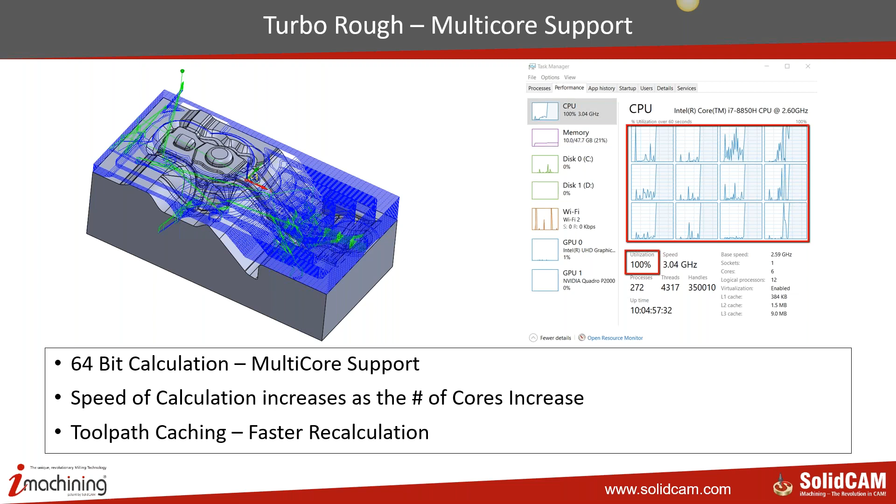The second highlight of Turbo Rough is the fact that you now have an option to define multiple surface offsets, which means you could define the entire model as one part, and then derive areas from there which need a different offset.

So this is very, very essential for mold and die makers, where they would like to give, let's say, on the parting surface, very less stock, and for the area that needs the part area, they would like to have a bigger stock. So this is one of the highlights of Turbo HSR.

Strategies, well, we have got hatch, contour, and rest roughing. All three strategies are currently available with us in Turbo Rough.

Rest roughing in Turbo HSR is based on two technologies. It's either on the updated stock or previous tool, and it also could be a combination of previous stock and previous tool. So it will find out the best possible areas to tackle and generate the toolpath only in that area.

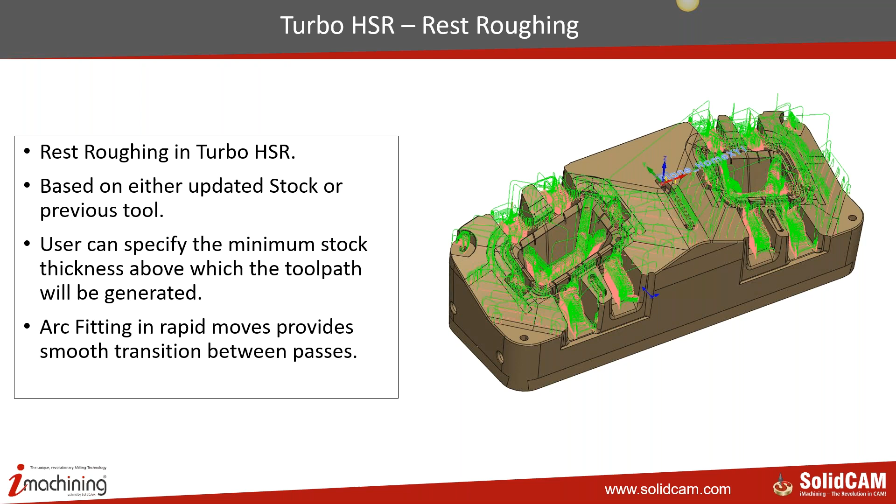You can do a local stock definition, which means you need not be dependent on the previous stock. For example, let's go back to this part here. Now, assume that the entire part was machined, and for some reason, some area needed reworking, so somebody fixed a small block of material in that region, and now you could go back to your roughing and you could say,

I would like to define the stock by surfaces. So I will pick only those areas, and the part will be the complete part, but the stock will be only the restricted area. No need to define any kind of contours or anything. Just define those 6 bounding surfaces, and that becomes the stock for that operation.

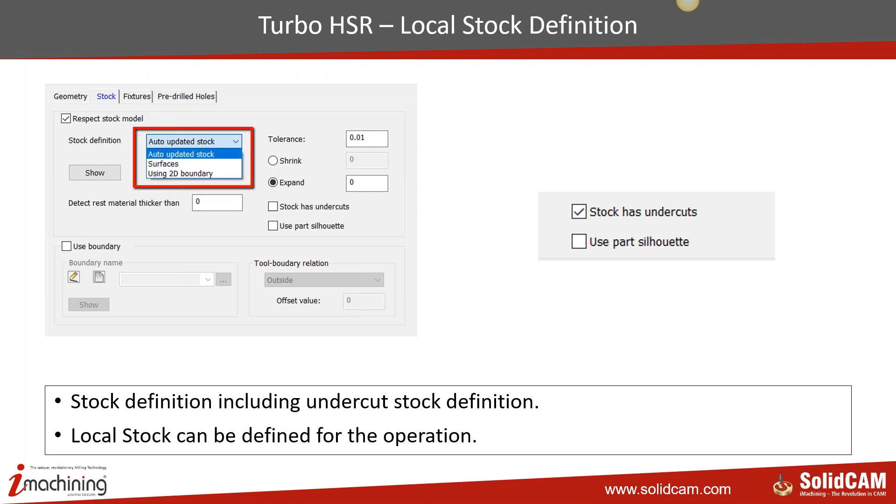Also, a very important feature is the undercut stock. I'm going to show you in this part that we are going to run today in generic 5-axis. It has got undercuts, so I will show you the effect, and you will appreciate that it dramatically cuts down the time when you compare it with our existing roughing engine that we have.

Fixture collision. You can now provide fixtures as surfaces, or it could be a complete model, or it could be just curves. You need not have the entire fixture model sitting on your part. You can just say this sketch is my fixture. It will understand that that particular area need not be machined. It will leave that much area.

You can also provide an offset to it, whether it's global, radial, or axial offset. And based on the offset that you have provided, it will leave that much area and move to the other area. It will not machine the area where the fixtures are. For example, you have clamps. So it will leave the area for the clamp and it will machine everything else.

Also, pre-drilled holes. You can have pre-drilled holes as a definition, and every time the cutter comes, it will dip into that region where you have done the pre-drill and just machine the part, mostly for cavities.

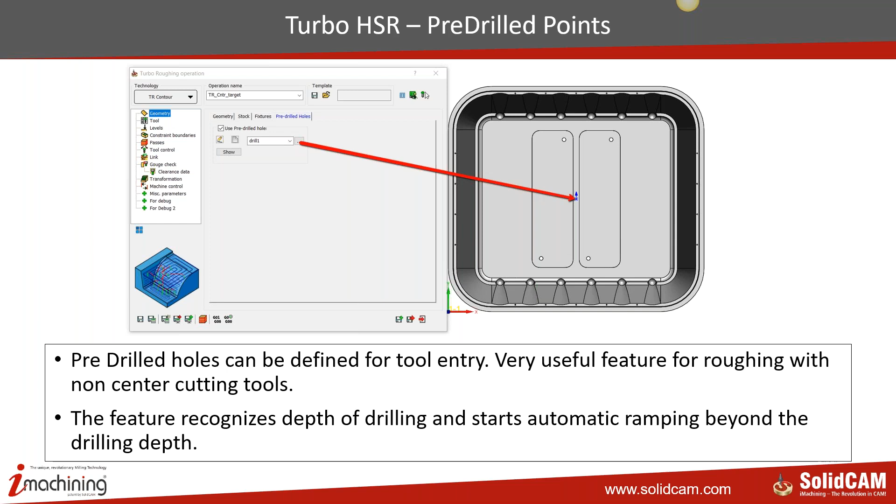Another very important thing is the adaptive feed rate. You can provide the minimum feed rate possible on that particular job with the particular cutter, and SolidCAM will find out the engagement of the tool with reference to the part and adjust the feed rates dynamically on the fly in the toolpath. In most of the cases, it will only drop it down because 100% is

my actual feed rate. So let's say it's going in a corner. There, it will automatically drop the feed rate based on the engagement it is getting with the part geometry. So this is a very useful feature for inserted kind of cutters. It increases your tool life and also provides a constant cutting condition.

Dynamic holder collision, also a feature of Turbo HSR. It provides collision-free toolpaths. You can provide your holder, and the holder will be checked against two items, depending on what the user has selected. It could be checked only with the machining surface to see if there's a collision with the machining surface, or it could be checked with an in-process stock, the dynamic stock that is available at that given point. It will be checked against that.

In most of the cases, the dynamic stock is the one that is to be used, but if you want, you could still use it against the machining surface. Of course, there's a possibility that you could provide both of them. You could say check against the machining surface and also check against the in-process stock. Remember, the more options that you push into the calculation, the calculation time is going to go up proportionately.

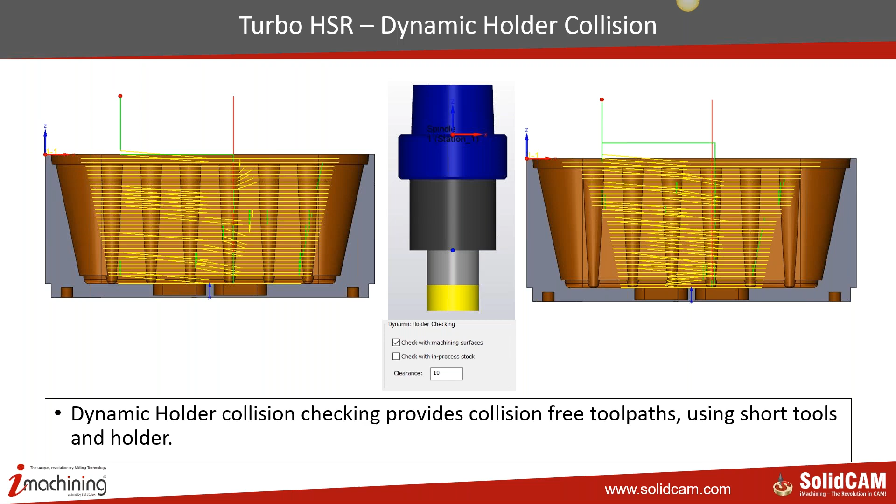Automatic ramping. You can just say, I would like to do automatic ramping, and then provide a fallback sequence or a priority sequence of ramping. So we have helical, zigzag, line, and profile. You can change the priority. You can say, I would like to first try a zigzag ramping. If zigzag fails, go to helical. If helical fails, go to line. If line fails, go to profile.

Okay. This is with the Turbo HSM. The announcements mostly were with the toolpath quality. We have got a much more accurate sharp motion now in the Turbo HSM toolpath, and we provide a very small radius so that we don't damage the wall.

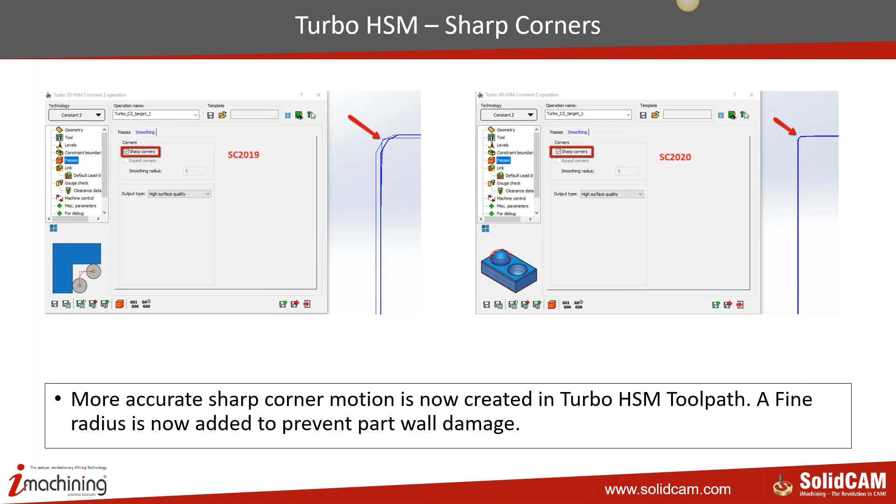A new operation, 3-axis undercut milling. It's a simple constant Z machining where you can just provide a model to it, and the cutters accepted are slot end mills or lollipop end mills. Either of them can be given as a cutting tool, and SolidCAM will go in all those areas where the tool can reach. It doesn't matter if it's straight or it's an undercut. If it's an undercut, it will try to get inside.

But the most important thing here is it will take into account the shank geometry, and it will make sure that there are no collisions with the surface when it's getting into the undercut region. So it's a very safe strategy to work with.

For example, the most common item that generally requires undercut milling are shoe molds. So if you have got a shoe mold and you would like to do undercut machining using a lollipop tool, you can just say, this is my model, this is the tool, this is the depth of cut, and it will ensure collision-free toolpaths against both the part surface as well as the shank with the part surface.

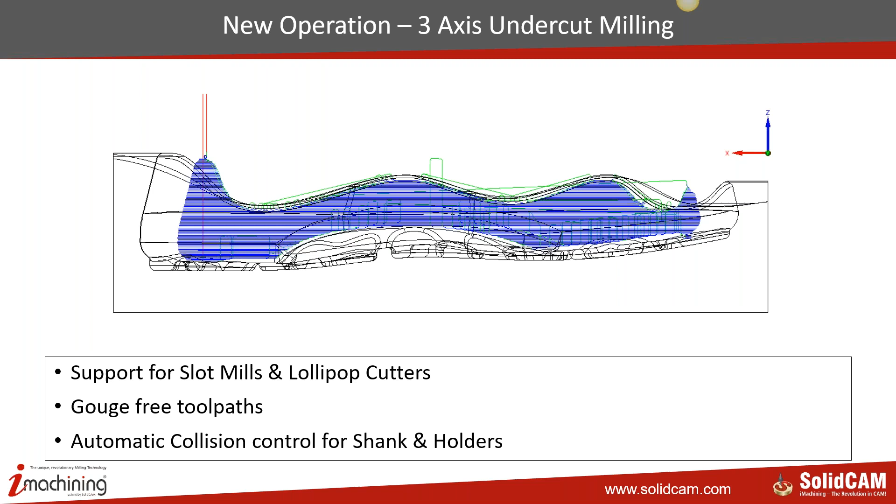Let's come now to HSS and Sim5X. It's more to do with Sim5X. First of all, you can see that we now have the progress bar. We no longer have vague messages appearing. You know exactly where the operation is, how much is done, how much is remaining, so nothing is blind. The entire calculation progress bar is now available for all Sim5X and HSS operations.

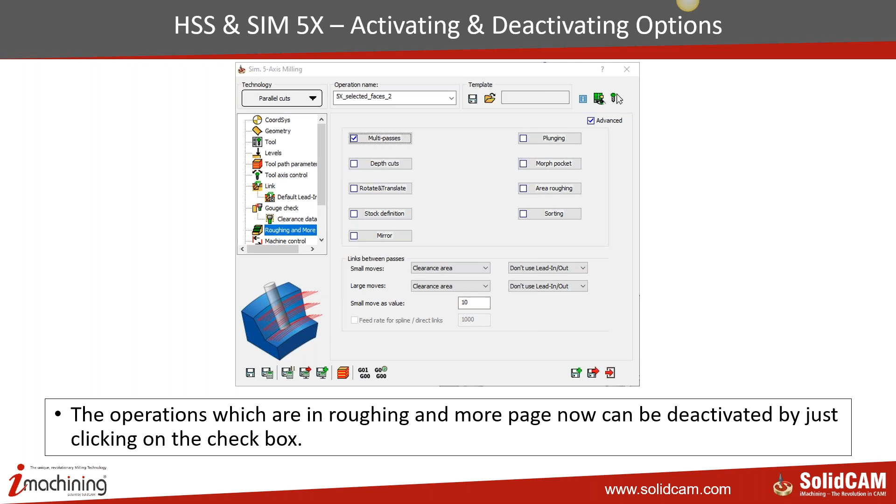You can activate and deactivate options without getting into the, let's say, for example, you want to do depth cuts and you just want to switch it on, so you can just select that and that will be done. This you will not see in SP0, but it will come in the subsequent sub-release of SP0.

Multiple boundaries definition in a single HSS toolpath is now possible. Earlier, even if you defined multiple, it would only take the first one and leave out the other two. Now you can define multiple boundaries in both Sim5X as well as HSS toolpaths.

Extension of toolpath. Earlier, if you had multiple faces to be machined and you said, I would like to extend the toolpath, the extension would be visible only on the first pass and the last pass. But now, because of regions, the extension is available for each region. Both the entry and the exit extensions are available for every region when you are doing the toolpath calculation.

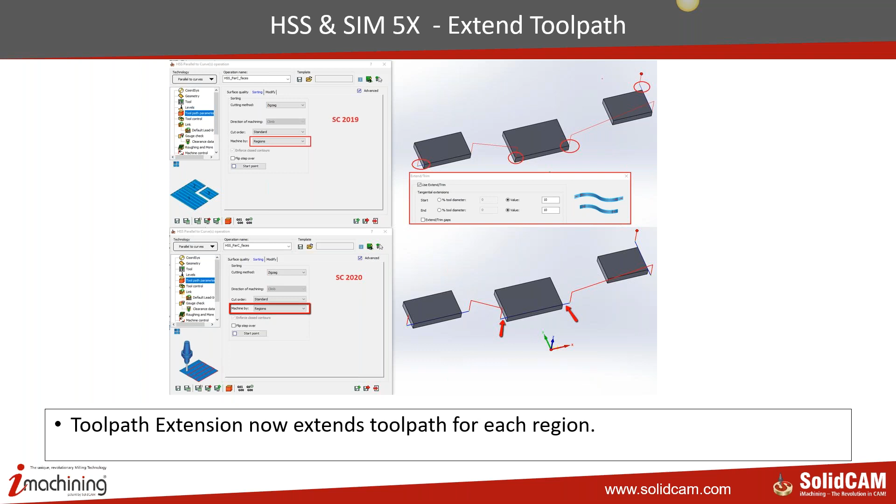Sim5X and HSS now come with a new option called automatic clearance plane. You need not define the type, you need not define the height. You can just define automatic clearance plane, and the tool will get retracted in the proper direction. The height as well as the type will be decided automatically by SolidCAM. Right. So these were some of the enhancements that we did with respect to HSR, HSM, and Sim5X.

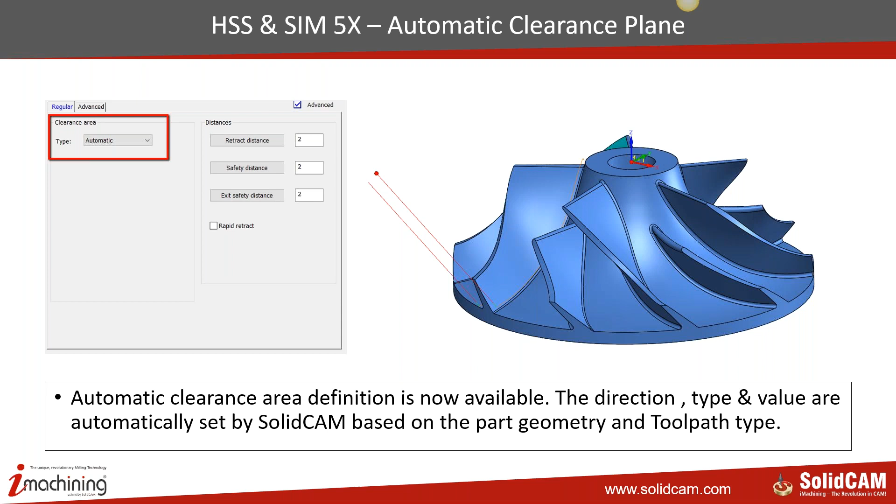Let's get to our part today. Okay, we have got a pretty nice part today to work with. And we are going to be working with this part using all the functionalities that are available to us. So I have got a nice part here and also the stock. So let's open the stock.

And that's how my stock looks like. I've already done the, you can see either I've milled it or I've done the wire cut, and it's put on the holding fixture. The holding fixture is then held on a vise and the vise is then put on a 5-axis machine. So we would like to do the machining of this part.

The machining of this part will see several operations. It will see some 2.5D operation. It will also see the new turbo HSR operation, and it will also see some nice generic functions. I would like to show you several of them as far as possible on this part, because in the next couple of weeks, we also are going to have different parts to work with.

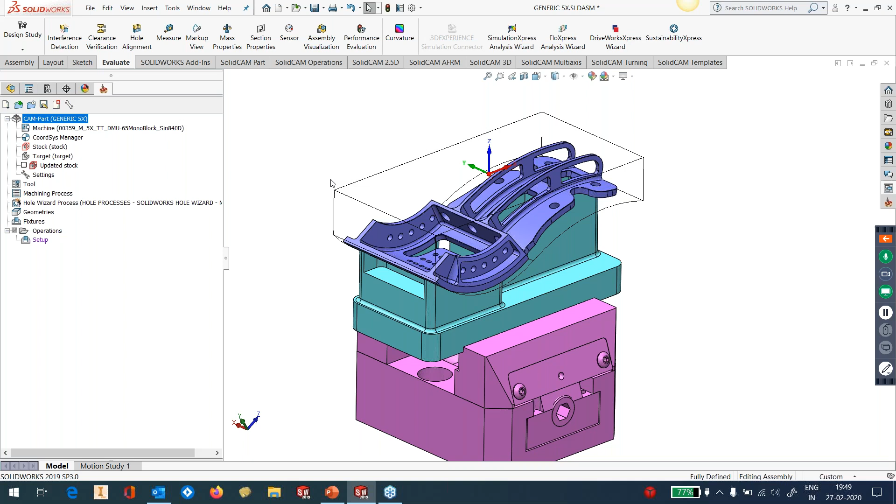Right. So let's start our operations. Now, what I've done to simplify this entire exercise of showing you the toolpath, I have saved a lot of templates. And this has to be one of our USPs. When we do a demo in front of a customer, we should have tons of templates, give a proper name, put them with the new version.

They are automatically segregated and arranged, so we don't have to worry about it. Each template goes into that particular operation subtype. Use as many templates as possible. Show to the customer how easy it is to work with SolidCAM, and it's really pretty easy. So let me open the template today, and the first thing I'm going to do today is to do some facing operations on all the 5 sides.

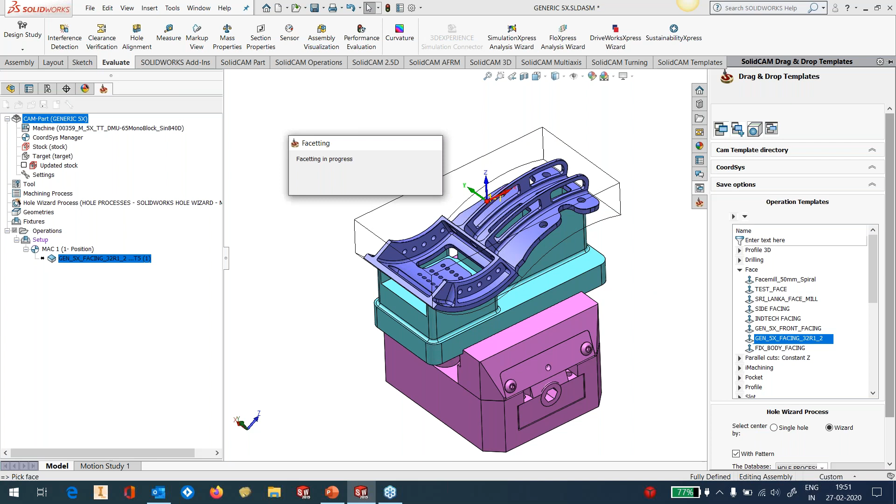So I'm going to call my first template. So I'm using a 32R 1.2 high feed bullnose for my facing. So I'm going to drag it and put it on this here. I'm using a stock-based approach for my facing. Okay, so let me edit this. We also have a possibility to edit the template once it is applied. Let's put that value. That's my toolpath. That's the first toolpath that I've generated.

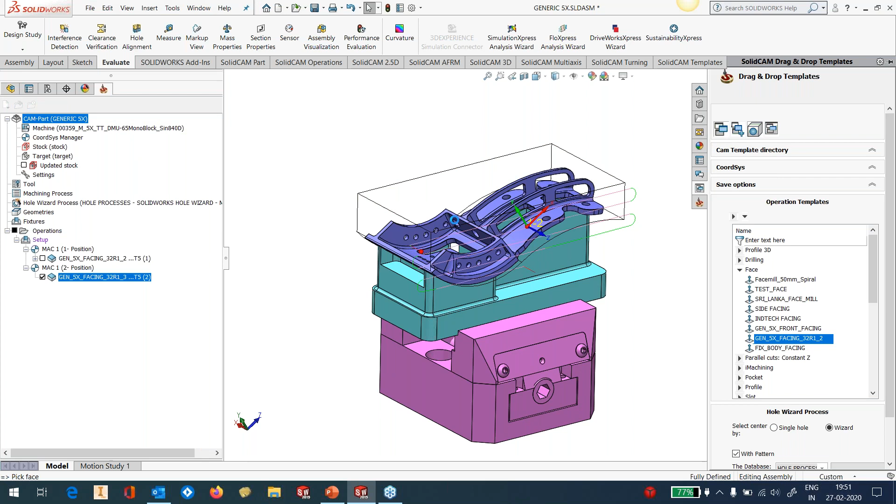The next one, I'd like to put on the side. Okay, let me edit this also. Okay, that's 0.3 millimeters. Calculate. Okay, let's take another template and apply it to the other side. I'm doing this because I would like to have a very precise stock for my new roughing operation. So that's the reason why I would like to do the facing, because my stock itself is about 10 millimeters plus on both sides. Okay. Sorry, it's already calculated.

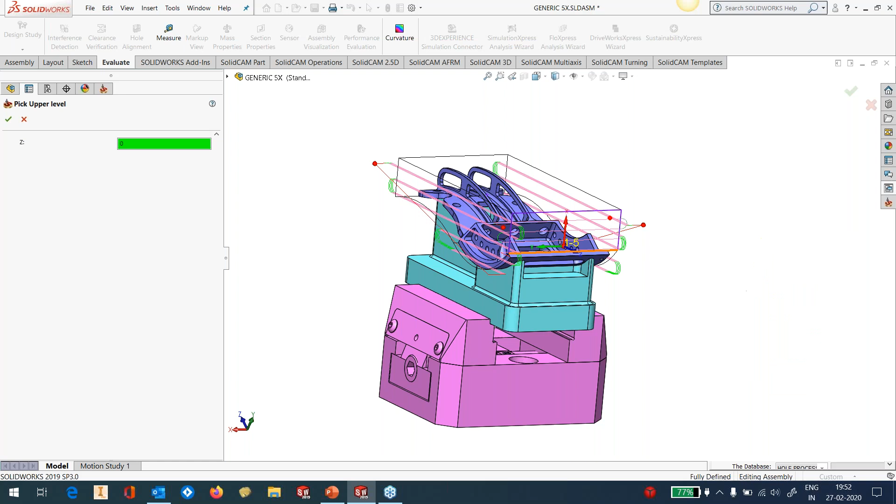Let's drag on this out here. Edit. Unfortunately, I did not save it. I've saved it as a single pass operation, but I would like to do a multi-pass. So it's also very important that we show that once you apply the template, you could easily edit this toolpath and change the values whatever you want, and finally get the results what you're looking for. Okay, this is done. So we have got our toolpath perfectly done.

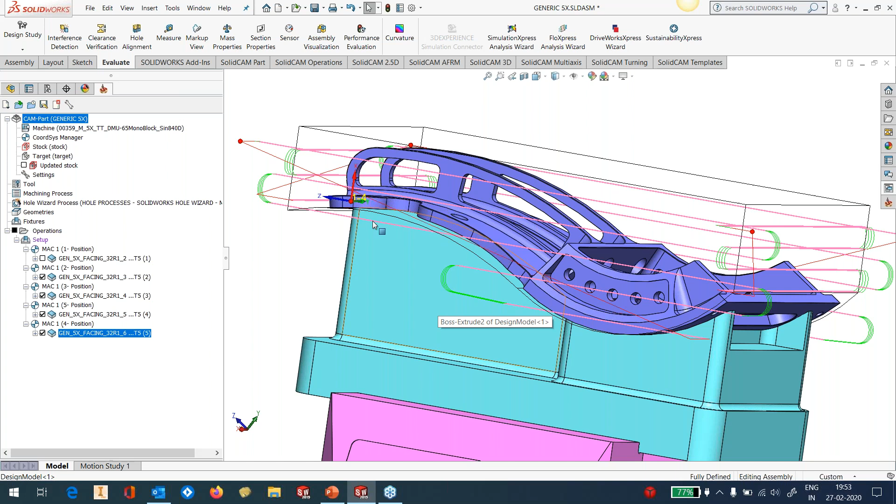Why I use the stock method is pretty simple. You can see that this particular stock is a shaped stock, and if I had not used the stock method, I would have got unnecessary passes here which would run in air. So in order to avoid those air passes, I'm now using the stock-based approach for doing my facing. Okay, so let's run the simulation a bit. Let's go into the SolidVerify. Okay, we have got the fixture, the stock, and everything ready. And let's quickly run. That's pretty fast.

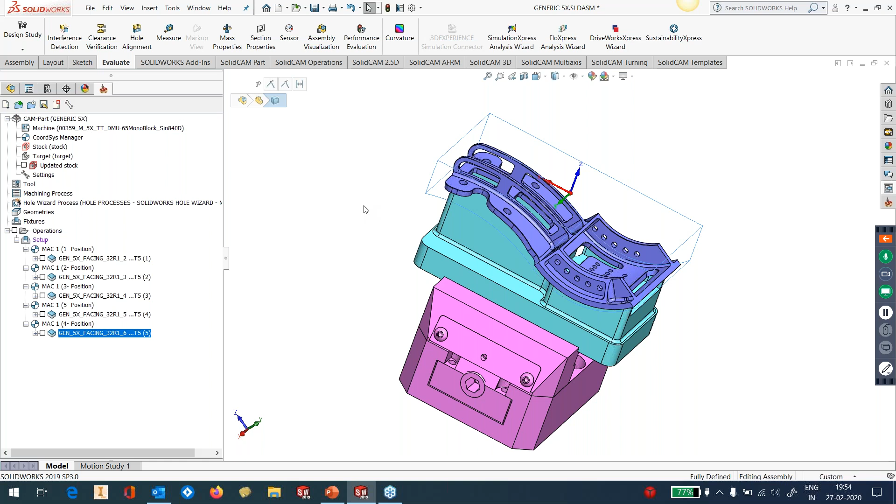That's good. So we have now shaped the stock exactly to the size that I want. And now we could go ahead and apply our first operation of 3-axis roughing. And like I said, let me just switch off the stock now. I don't need it anymore. Okay, like I said, we are going to use the turbo roughing. All those features that I showed you, we are going to now apply those features. So I'll go to my template. I already have my template here in the offset, 3x rough offset.

You can see that with 2020 now, each of the templates are arranged according to their type. So all facing templates will go into the facing templates zone. Drilling templates will go into the drilling templates zone. Roughing templates with 3-axis will go into the 3x rough offset zone. So I'm going to just drag and put my template here, just apply OK. So this is our new roughing operation. So you have got contour, hatch, and rest rough.

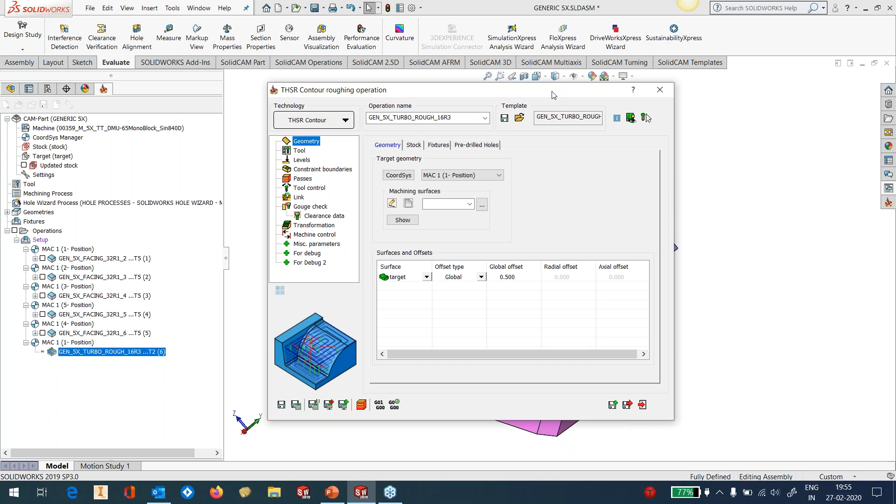So let's go to the geometry page. I'm going to spend some time, but remember that we are going to have a special webinar only for the turbo technologies a few weeks down the line. But still, I would like to touch on this since I've used it in this part.

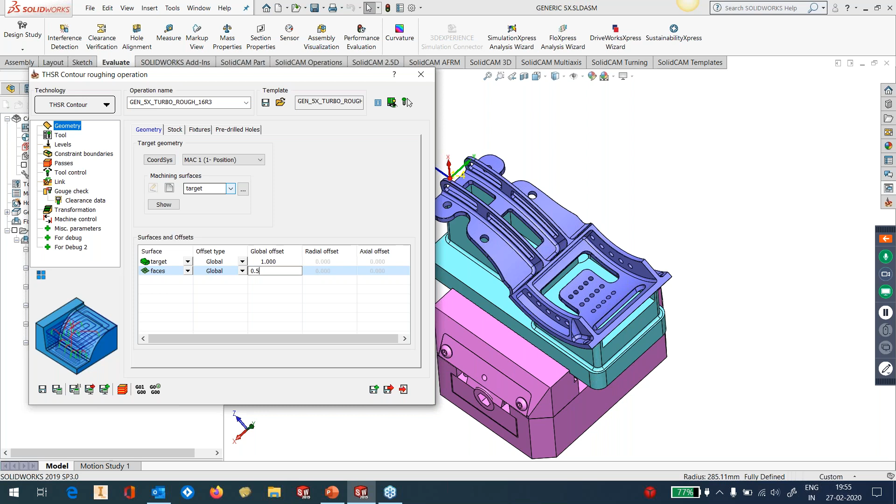So first of all, we are going to select our target. This is our main target. And then I have got my offset type. I would like to keep 1 millimeter offset on my entire target. Now, you could say, on this face I would like to keep 0.5. So go here, select, and select the face, maybe both of them. And here you can see that immediately you get an option to put a second offset. So I would like to put 0.5 millimeter for this.

And you can do it for an infinite number of groups. You can have infinite offsets, but trust me, it's not a great idea. Generally, there are 2 to 3 groups, not more than that. But the fact is that you can now define different offsets for different groups of surfaces. What we do basically is from the target, we subtract these faces and have a different offset for them, and for the remaining target, we will have a different offset.

Okay, but we don't need it, so I'm going to delete. We would like to keep 1 millimeter everywhere. Stock, I would like to respect the updated stock. I don't need to define a fixture here because we don't really need it. Let's go to the tool. I'm using a 16R3 bull nose tool. And here I'm saying with the dynamic holder collision checking, check with the in-process stock with a clearance of 2 millimeters.

Now, go into the feed control and you have got the adaptive feed rate here. I'm going to switch on the adaptive feed rate, and say the minimum feed rate it can go down to is 60%. I would like a rapid approach and a rapid retract, and everything in between will be G1 with this feed rate. Only the first and last motions will be in G0, whereas all motions internally will happen in G1.

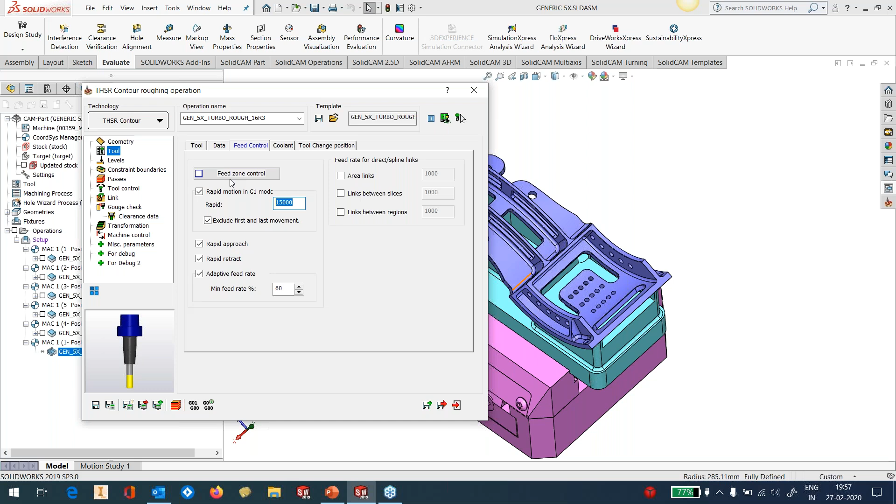You can also provide, like HSS, feed control zones, but you actually don't need it because you already have an adaptive feed rate. You can have different feed rates for links, link between slices and link between regions. You need not use 15,000, maybe you can use 10,000 or 20,000, whatever you would like.

Let's go to levels. You can see that in our levels, we have the clearance plane, and we have said detect the plane height automatically. You don't have to put the value. The plane height will be decided by SolidCAM automatically. You only have to provide the retract distance, your safety, and your exit distance. And up to what level should the tool come in rapid or in G1 15,000 feed rate?

Here I've said up to my previous Z height. So whatever my depth of cut, if it is 1 millimeter and I've already done 5 millimeters, it will come in G1 15,000 to Z minus 4. And from Z minus 4 onwards, it will use the plunge feed rate. I'm also going to use an arc fit for my retracts with a radius of 5.

Boundary, you can see that it's not essential in turbo roughing to use a boundary. The moment you use the boundary, you're restricting the tool and telling it that it cannot enter from outside. By providing just the stock and saying I have a center cutting tool, you tell the software that it can approach from outside, but where it cannot approach from outside, it can ramp into the part. So it's not always essential to define boundaries with turbo HSR. You can skip the boundary definition if you have the stock defined properly.

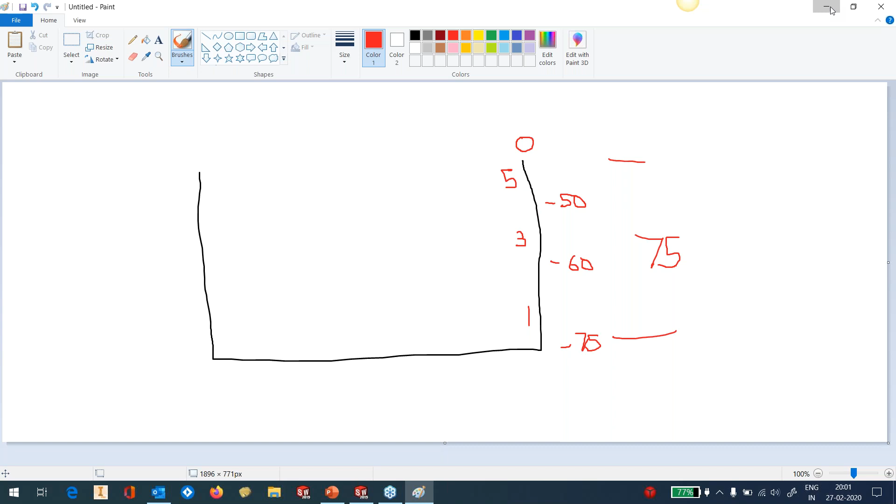It's sometimes essential, especially when you're doing deep jobs, that once your tool starts getting in deeper, you would like to reduce the depth of cut. You need not go with the same depth of cut. You can provide a range and a depth of cut, and it will apply it similarly to your part. You can machine the flatlands straight away in the very first attempt. You need not come back and do another roughing operation.

Smoothing: you can smoothen the corners, the final contour, you can smoothen the links, and you can also minimize the links. So it will link regions in such a way that reverse linking is minimized. It does not come back to the same region after doing something and do the region again. So those things are avoided. Nothing much in the tool control.

In the link, like I said, we have ramping. You can pick auto, and then you can set your ramping priority sequence: line, helical, zigzag. You set the sequence, and the software will pick the kind of ramping automatically based on the area and the profile. We don't need to provide gouge check unless you are having collisions, but it's going to be very, very rare that you'll have collisions with Turbo HSR.

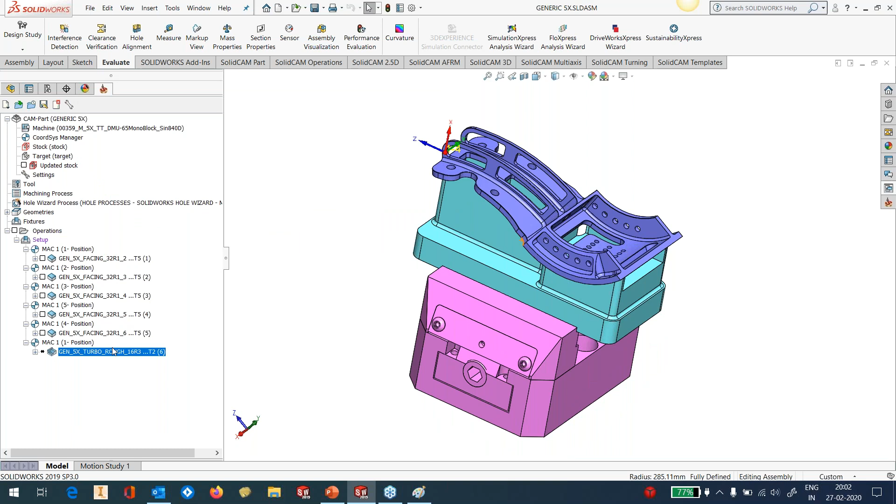We have got both translate and mirror in this. We still don't need anything, so let's save the operation and hit the calculate button. For people who are very interested, you can look at the CPU utilization. It was 100%, because now it's almost done the calculation. So there's no more CPU utilization, but I'll keep this window going.

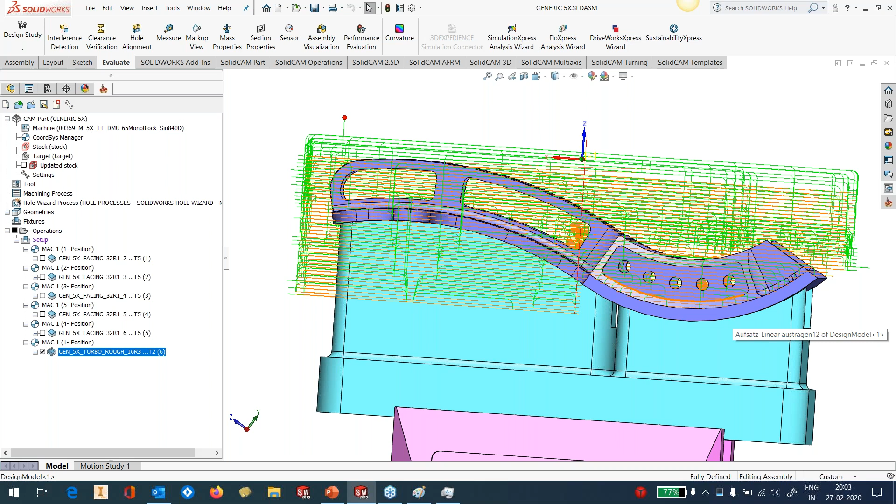So I get a toolpath. If you were an HSR fan or an HSR person who's worked a lot, you would realize that your stock ends here, but your passes are still going down there because the region still is on this side. These passes are going in air. Our solution if we did not have Turbo HSR was to create a surface here and forcibly stop the tool by providing that surface as part of the part geometry. All those things are not needed.

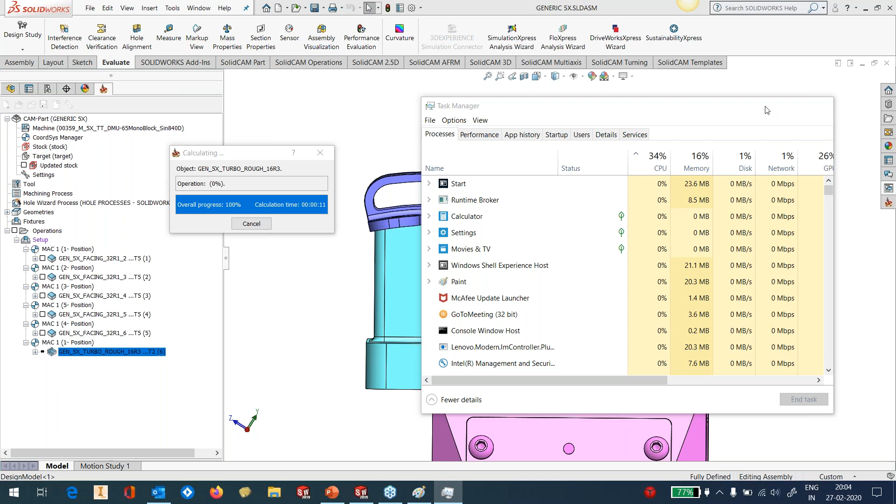So let's edit this toolpath. Let's go into our geometry, stock. I simply select the stock as undercuts button, save it, and calculate. Again, we are almost touching 100% CPU utilization. Since it's a pretty short calculation, you cannot see it, but trust me, all cores will be utilized 100%. You can see the result now. It understands that the stock did have undercuts, and it was only doing air machining otherwise. So now it has taken the shape of the stock and stopped the toolpath accordingly.

Very important feature, because you could be spending at least 15-20% more time just cutting air and doing nothing else. Your customers or your own colleagues will say that this could be removed with editing, but editing for me is a dangerous operation. The best thing is to generate properly without having to take your scissors and start cutting, because you don't know what the potential hazard of editing would be.

So a very important and nice feature where it takes the shape of the stock and exactly machines it the way the stock looks. If there's an undercut, it'll exactly stop there. Very important feature. So let's move ahead and start with our generic 5-axis.

I've been asked several questions several times. How does our software fare with X? How does our software fare with Y? How does our software fare with Z? How do we differentiate?

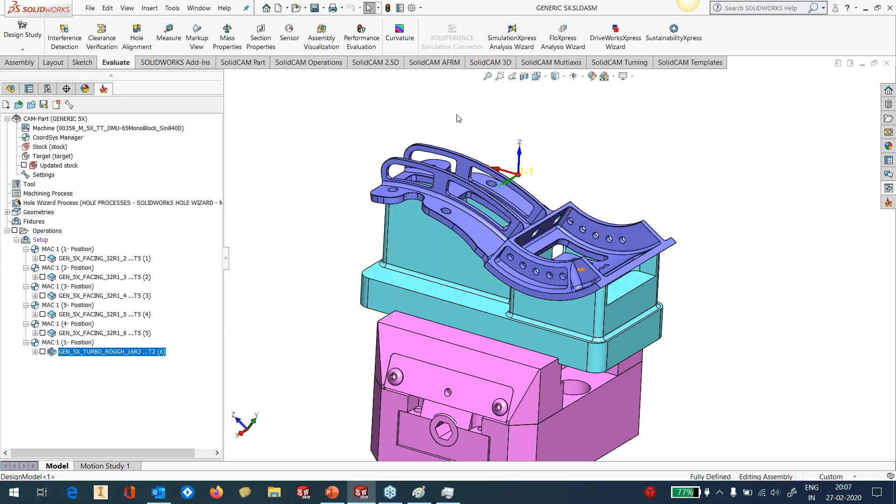So let's start. First of all, I have this area to be machined. I still have material here, so I would like to shave this material off and finish this face. What I'm going to do here is use our swarfing engine. I've got my templates for swarfing, so I'll go to swarf machining, and I have got the side swarfing - I just take it, drop it out here.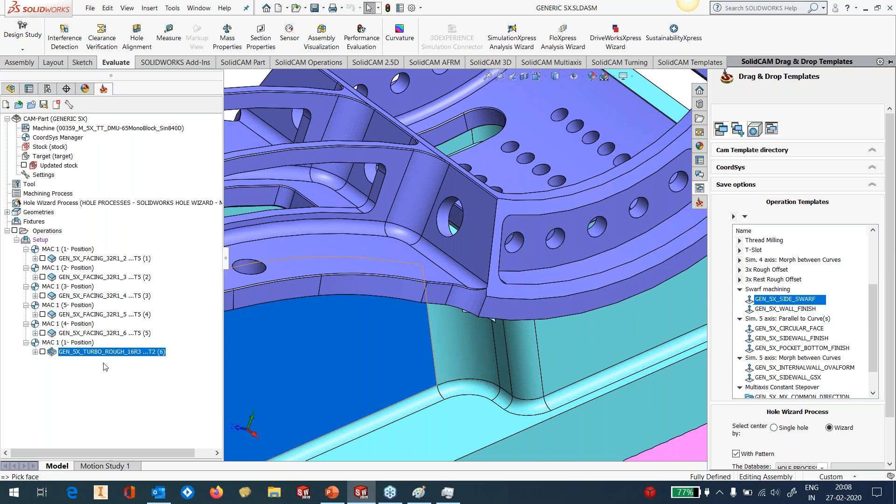What I just need to do here is define the swarf surfaces. So I'll pick the swarf surface - that's my surface. And remember, this particular swarf surface has got two possibilities: the tool can come from here, or the tool can also come from here, because we have not said from which side it needs to come. So in order to make sure the tool comes from the proper side, we just will define two curves.

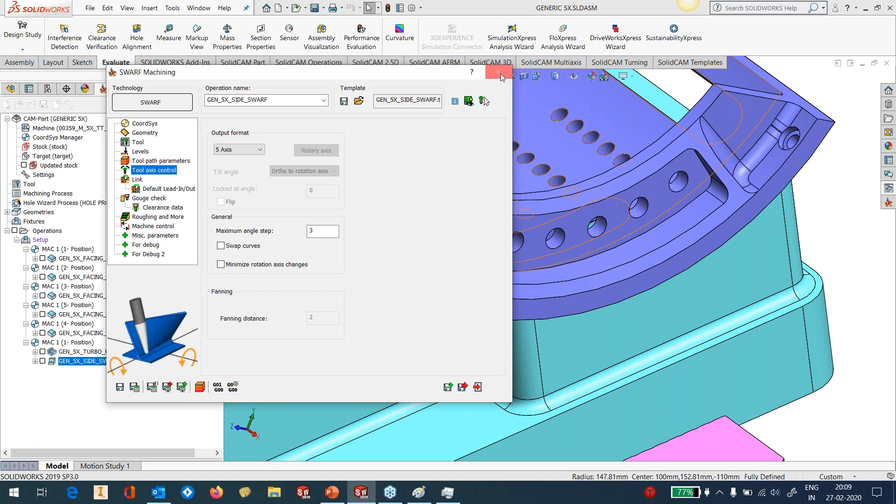The upper curve - okay, not that much, that's fine - and the lower curve. Okay, we don't want it to go there. That's done. And you show the customer: look, my tool is all defined, everything is defined. I simply hit save and calculate, and I get the toolpath. That's it, it doesn't take much time.

So let me change the color so that the toolpath is visible - I'd like to change it to yellow so that it's visible. Save and exit. So that's the toolpath, very neatly done. And if I now run the simulation, or show you the HostCAD simulation, this is how the tool is going to look: one pass, second pass, third pass. That's it, my face is done.

Trust me, I was at a customer a few weeks back, and the customer recently had bought SolidCAM, and was a user of one of the most powerful 5-axis software solutions. I sat with him because he became a nice friend of mine, and I asked him, I would like to see some things in the software because I've heard a lot about it. So I asked him, just show me a simple swarfing operation - take a straight wall and show me how the swarf works. The customer had used that particular product for a couple of years, so I believe when you've used a product for a couple of years, we expect that you know at least some things in it.

But trust me, even a simple swarfing operation, which is not automated - you had to define a lot of things. It was a nightmare in that product. But look, I've picked up a template, just came, applied, selected my geometry, my toolpath is done. I did not break any sweat on this particular toolpath. So the whole idea here is to tell you that as long as you're on the highway - when I say highway, I mean those automated functions like what we have: impeller milling, port machining, screw machining - as long as you're on the highway, most of the products are pretty much similar.

Obviously it won't work because it still needs the curve, so I'll pick the edge curve—that's my edge curve. What I've done is kept a margin of 1 millimeter from the wall, so I'm not going to touch the wall; I'm staying 1 millimeter away. So all I now need to do is hit save and calculate.

Okay, this is T3. Let's look at what T3 looks like—this is my toolpath that's done. You can see we've provided a very nice ramp. Again, this is a trick I think everybody knows.

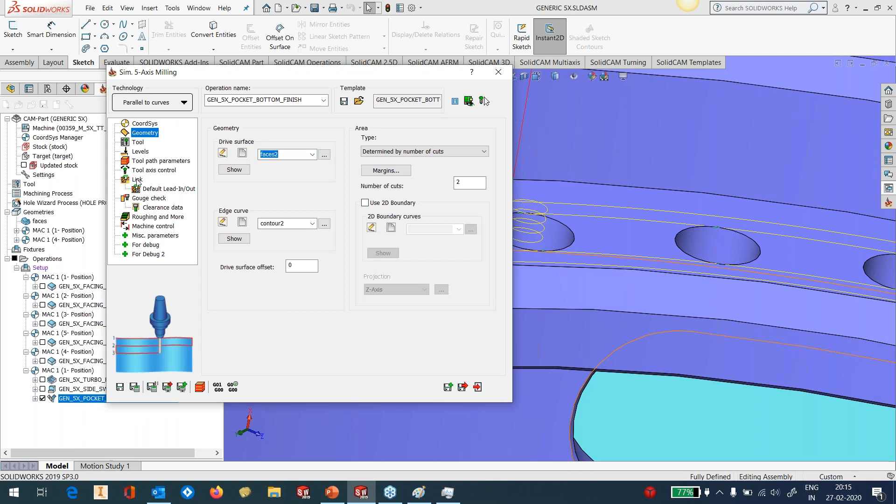There it is, very nicely done—it approaches inside, finishes the floor, and retracts. Done. Again, in the levels, I've used the clearance type automatic. I didn't specify where my plane is or how far it has to go, nothing—I just said automatic, and it's done.

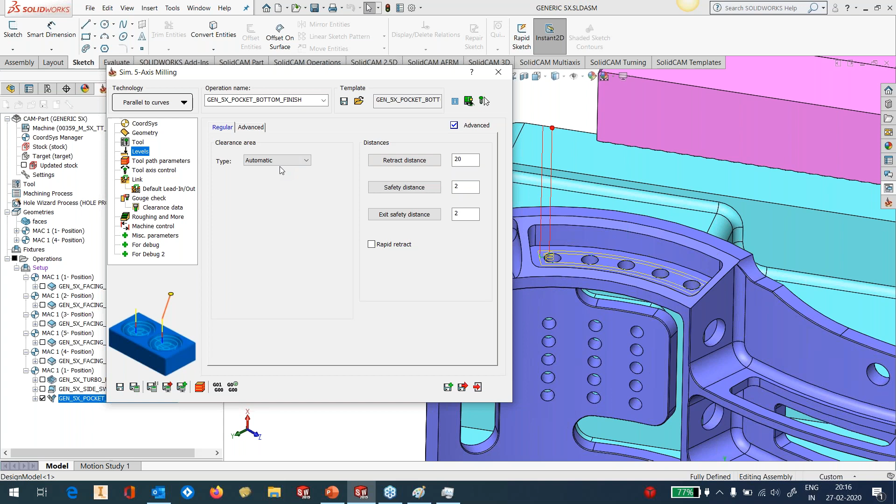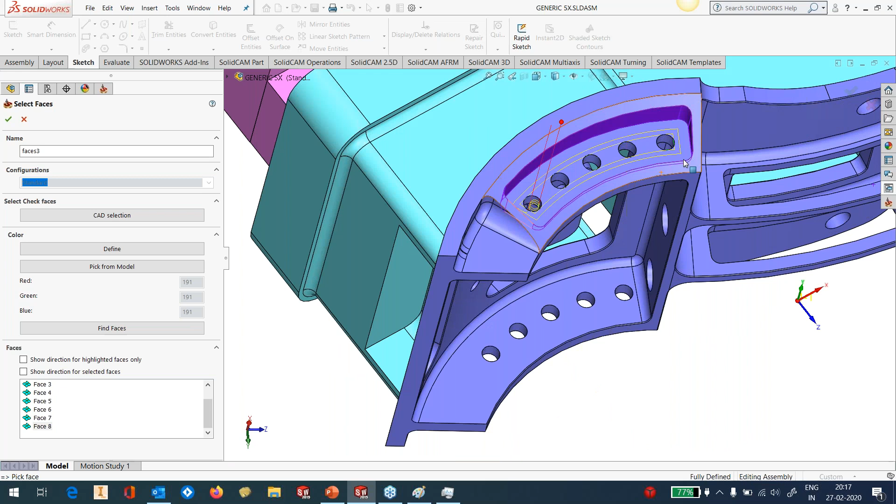Once that's done, I'd like to finish the walls with my generic setup, using a swarfing technique. I'll go to my swarfing templates—I've got the wall finish template here—just drag it and put it into my tree. Let's define the walls I'd like to finish: pick this and this. Okay, say okay. I expected that, so I'm going to use and drop it here instead.

So let's go to the geometry, swarf surface. But in this case, I'm using a different way of using swarf. I'm not going to use the automatic functionality of swarf, but also going to provide a floor surface so that my tool goes there and stops.

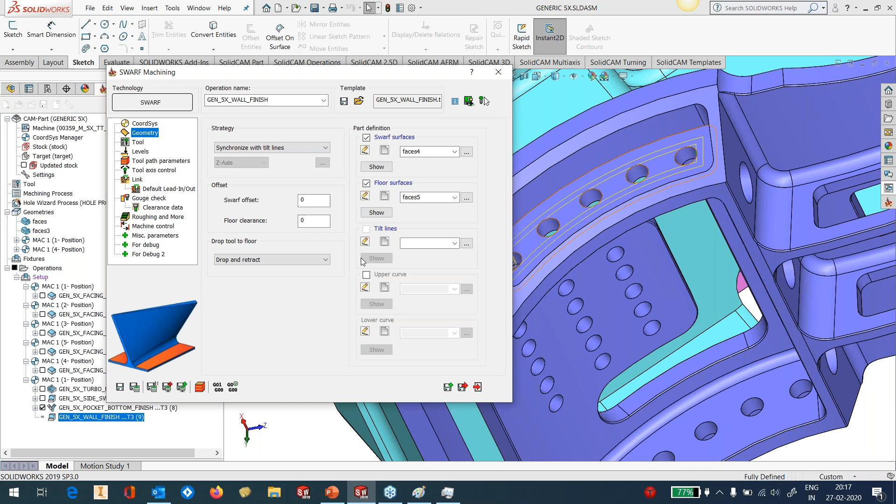I'm also going to use tilt lines because I want to control the tool axis. I don't want the tool to dance in areas because some of the surfaces are not great, they have different ISO lines, different widths. That's the reason I'd like to define simple tilt lines, 8 of them.

So just pick 2, the third, okay, fourth, then after the fifth one, sixth one.

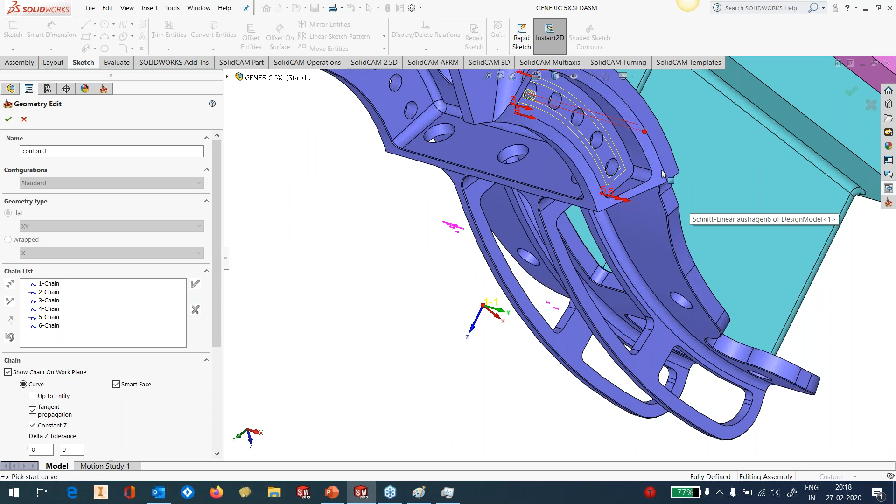You will ask me why did I not save this also, but you know, I created a new part. I'm only using the templates for my parameters and the strategy. I have got 6 tilt lines. That's okay, and let's calculate.

That's done. So I have now got the side machined also. It is not 2.5D, by the way. It has got some kind of draft, and if you look at how the simulation looks like in SolidCAM, this is how it will look like.

Neat. Again, here you can see automatic clearance plane, no need to define anything. Okay, that's done. Let's look, because it's a symmetrical part, that's the reason I'm doing only one side.

Let's look at this region here, and I would like to now tackle this region. Again, I have got templates. Here I've used the generic 5-axis template. So I'm going to go parallel to the wall, parallel to curve, rather, side wall finish.

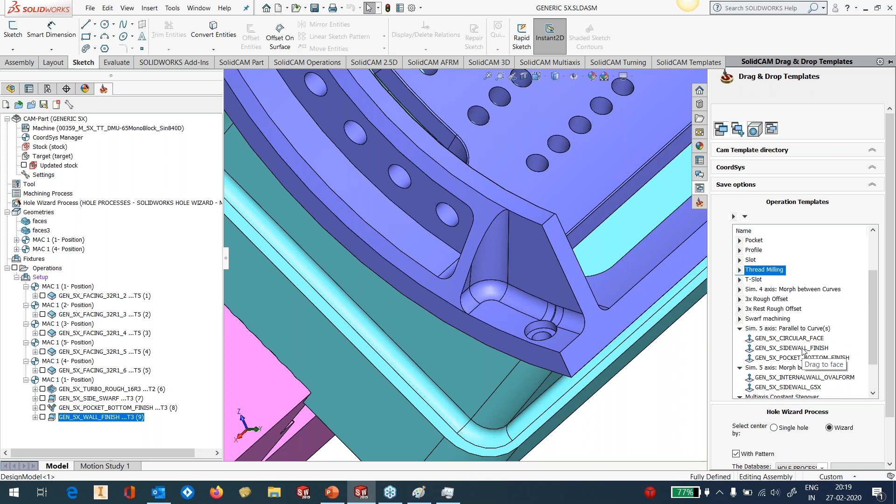Okay, let's drop it here. Say okay, let's open up the operation itself. My drive surface, 1, 2, and 3 drive surfaces. And my edge curve is this one. Reverse it.

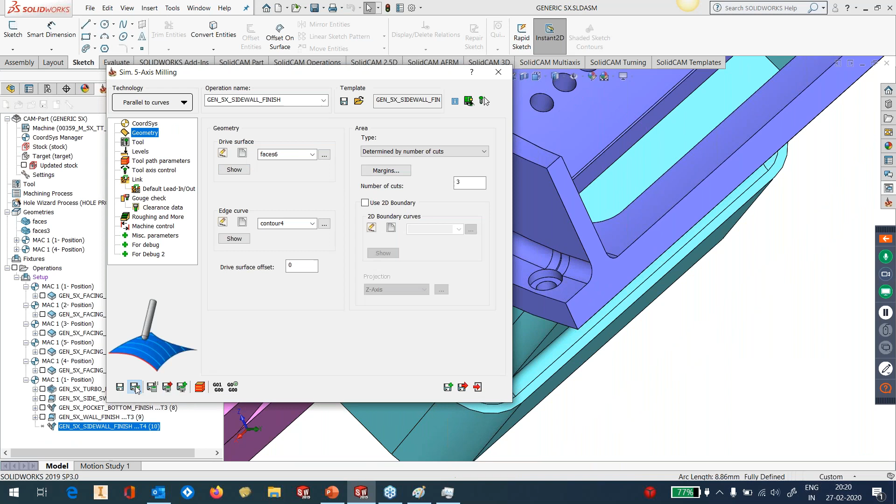Okay, sorry, so let's pick the small things. Okay, that's done. That's okay, and let's calculate. That's the best part of templates, you just pick the geometry and your calculation is done.

Again, automatic clearance plane, no need to define anything. Okay, you can see that. And the most important thing I missed: automatic arc. It uses dual arcs, horizontal and vertical, and applies it according to the situation and according to the geometry. Okay, so 3 passes and my wall is done.

Simple. Right, now let's come to the main area, the walls that we need to be careful about.

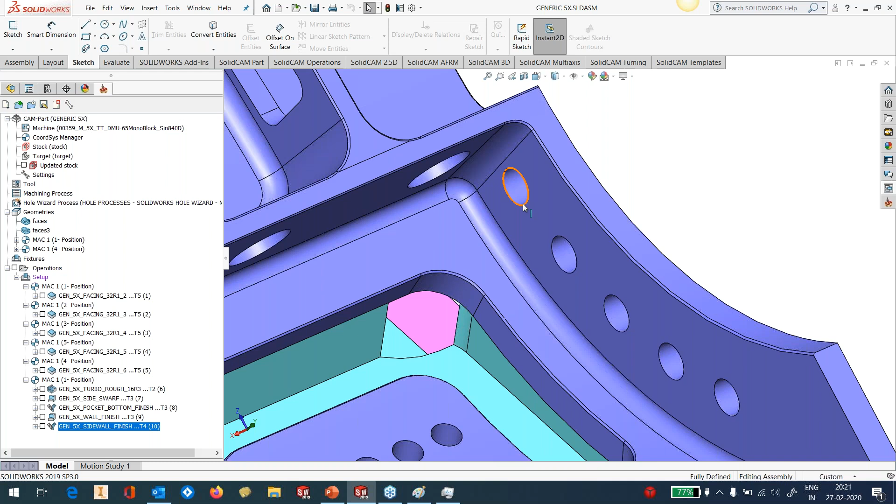Although some of our technologies today can handle holes and other things as part of the links, a better way is always to close them when you're doing 5-axis, especially when you're using circle segment end mills or barrel tools. Because now I'm going to use barrel tools to machine the inside of this region, the walls.

I'm going to use barrel tools. What are the advantages of barrel tools? The biggest advantage with the barrel tool is that it has got a big radius, let's say a radius of 95 or even 100, and to get a similar scallop, let's say I want a scallop of 2 microns.

If I want to get a similar scallop with a ball nose end mill of, let's say, 10 diameter or 12 diameter, I need to define a step down of anywhere between 0.1 to 0.2 millimeter to get that scallop. With a barrel tool, I can get the same scallop by going up to 1.1 to 1.5 millimeter depth of cut. So your machining time dramatically comes down.

But with the barrel tool also comes a lot of challenges. How do you handle those challenges? Okay, so what I'm going to do now is I have got some surfaces that I created, which are basically the untrimmed surfaces. I'm just going to switch on those surfaces.

Okay, those are the surfaces that I've untrimmed and kept ready. Like I said, with circle segment end mills, you need this. I'm going to show some other things where you don't need to do all these things. Okay, right, so let's apply another template.

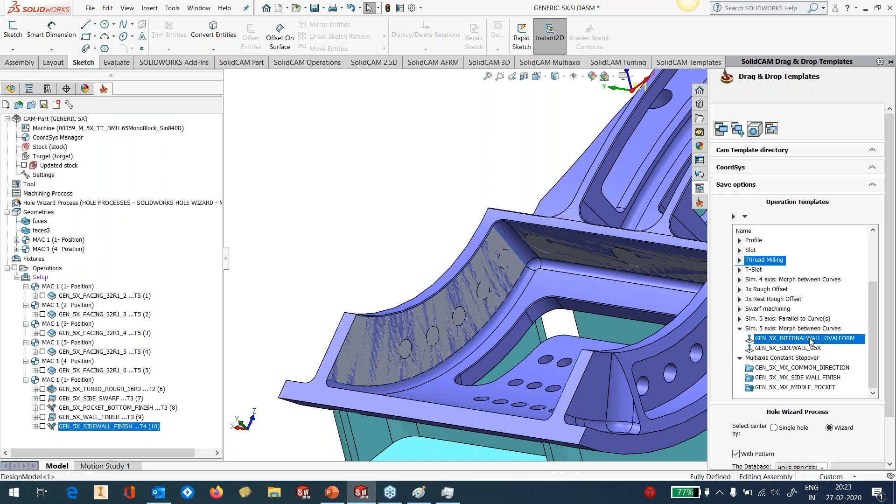This is going to be a very nice exercise today where we're going to do a lot of template-based machining. So I have an oval form tool with 5-axis, and I'm going to apply it here. Okay, it's morphed between 2 curves.

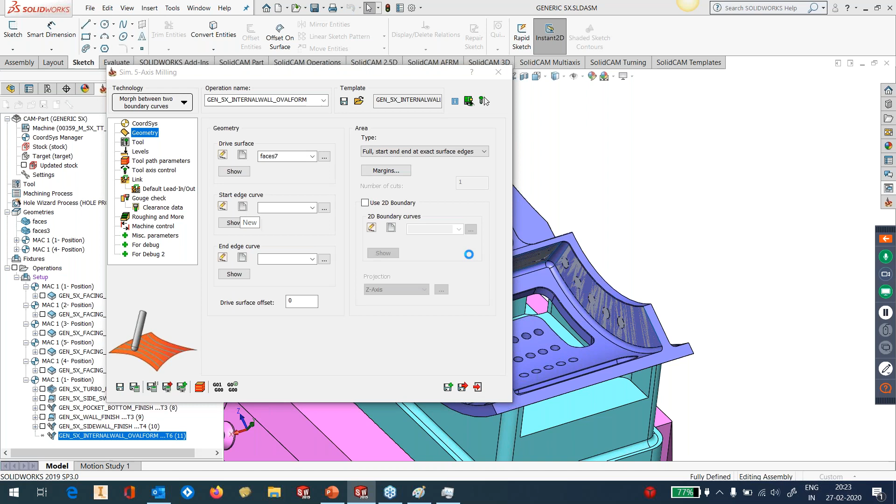So my drive surface, 1, 2, 3, 4, 5 - these are my 5 drive surfaces. Saying okay. Since it's morphed between 2 curves, I would like to define my curve. Of course not, that's not how I want it. Let's pick curves manually.

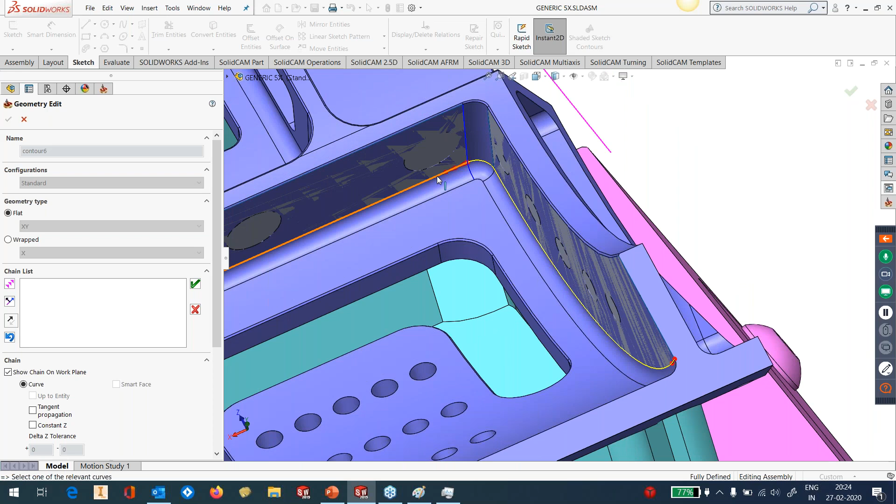Okay, that's done. Say OK. That's my first curve. The second curve, I would like to pick here. Nope. I always keep forgetting that I need to switch off that tangent propagation, but that's fine. Doesn't take much time. Okay, that's my second curve.

That's done. So the tool I'm using today is from Emuge. It's an oval form tool, diameter 6, with the bottom corner radius 1 millimeter and the profile radius 95 millimeters. So I'm using this tool today. And the area that we need to focus ourselves on is the tool axis control. We need not define any angle with oval form or with barrel tools. You can just specify on the barrel form.

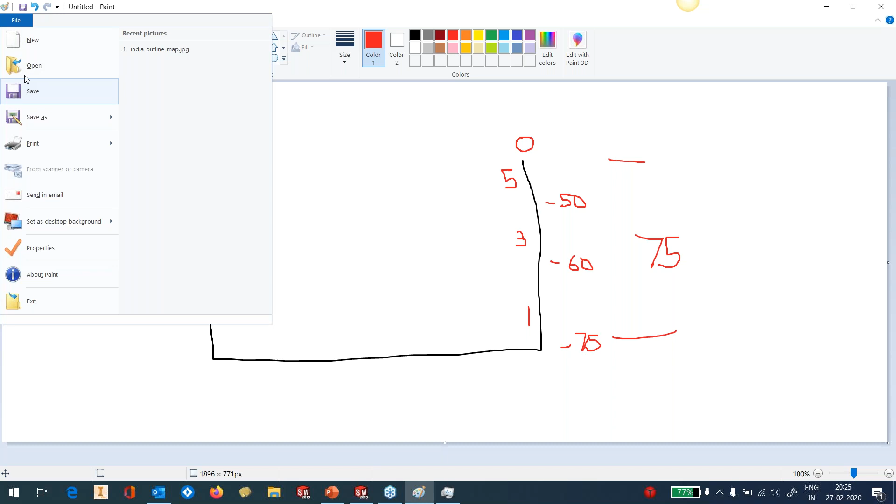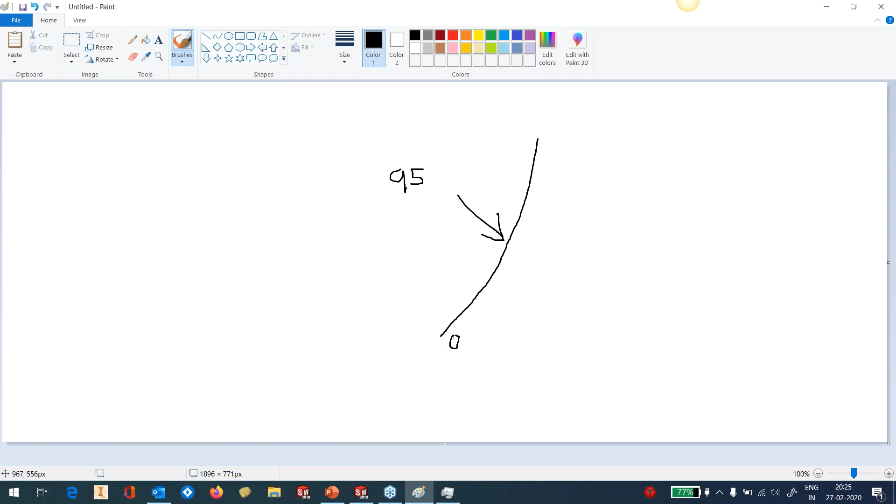For example, let's go back to our paint. Let me save this. So I have got this form here, the oval form. So what you have here is the barrel section. On the barrel section, we have got a line parameter. Now, what does it mean? It means that I consider the bottom where my barrel section, this R95, is finishing. This is the R95. The bottom area from where my other radius starts, that point is considered 0. And the topmost point from where my shank starts is considered 100. So this is 0%, 100%.

So I can specify a point on this barrel profile or oval profile, let's say at 30%, and I can tell SolidCAM to keep maintaining this point in contact with the surface every time. So the moment I specify this point, SolidCAM will automatically derive the tilt angle and maintain the tilt angle throughout when it's machining the surface. So it becomes much easier.

Now there are a couple of methods. One is you could keep it constant at 30%. The other one, you could say start at 80%. Your first engagement will be at 80%, and you finish at 15%. So it will keep varying the depth of cut over this profile. Very nice feature. Thereby, you increase your tool life because you distribute the wear evenly on the cutting edge of the tool. But here, what I've done is I'm using 30% as my contact.

Perfect. Let's go to the gouge check, and I have got the tilt tool. Now, in tilt tool, we have got something very nice for barrel tools, and that is smoothing. So the tool path will be automatically smoothened when it detects collision and it tilts. You won't actually see anything on the tool path. It looks so nice, clean, and smooth. And this feature is enabled only if you select any of the barrel tools: oval form, taper form, or barrel form.

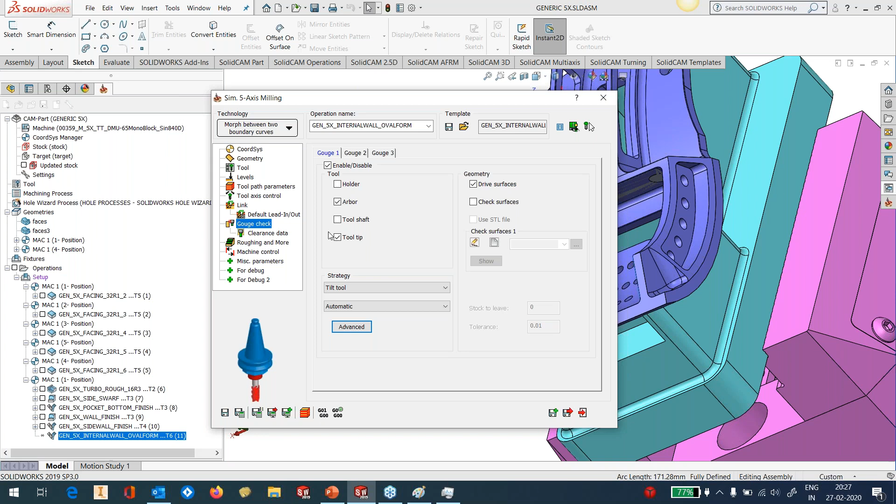So with the drive surface, I'm going to tilt. I'm going to tilt against only the tool tip and the arbor. I'm not bothered about the tool shaft. And my second gouge check is against the surfaces at the bottom, where I'm going to just trim and relink those surfaces. So I'll pick those check surfaces. These are my check surfaces. Okay, and this one. Perfect. That's done. Let's save and calculate.

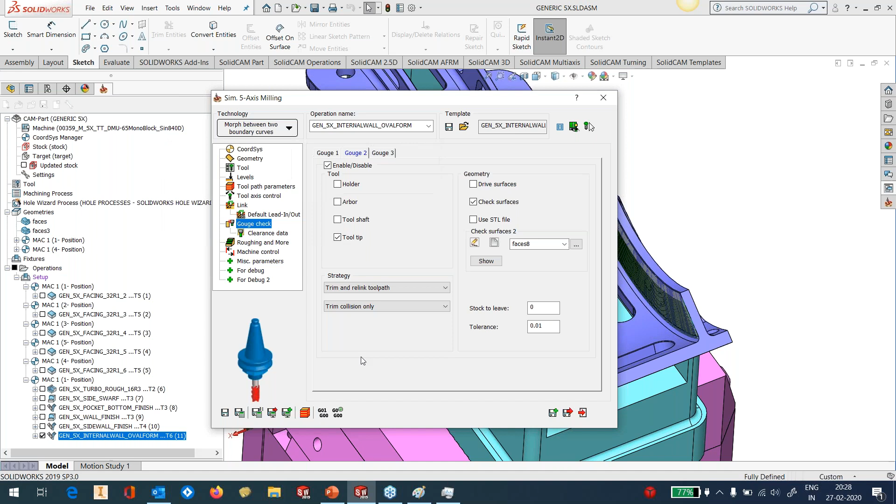Perfect. So we have a nice tool path. Let's switch off the surfaces that we opened up. And I have a pretty nice tool path here. Very nice entry. And you can see what happens even at the corners when it gets the collision and it does the auto tilting. Even those areas have been smoothened out. Very nicely done tool path with a barrel tool, with an oval form tool, circle segment cutters. This is what we have to call them. So this is how the simulation will look.

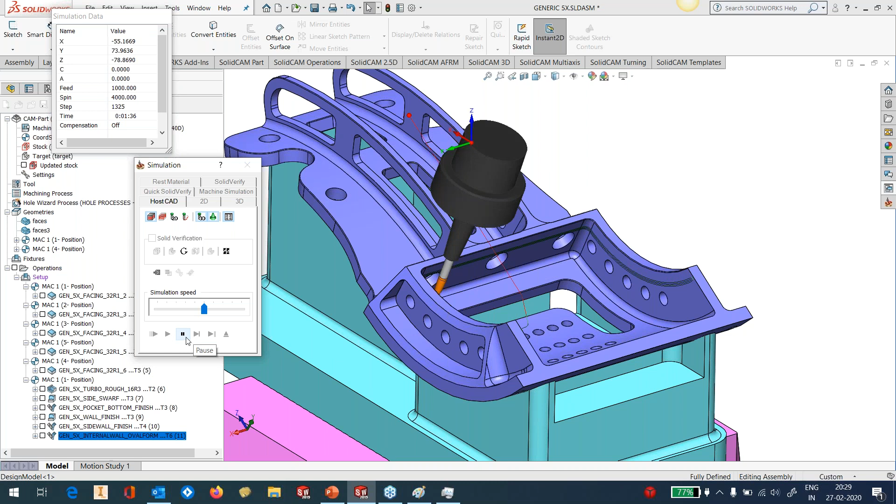And you can see that it will always maintain that 30% point on the tool. So my 30% point will roughly come somewhere here on the tool. That's the 30% point that it is constantly maintaining throughout the cut. Even when it goes down, it will still keep that point in contact. So several of the passes at the bottom will stop. They will not be machined because I've told the software that it needs to maintain that 30% always.

Okay, good. Now let's go to another very nice, interesting function in SolidCAM 5-axis. I'm not sure many of you are using it, but after you see today how it is to be used, most of you will shift all of your generic 5-axis to that function. I'm talking about multi-axis constant step over. It's an underdog, you can say, but when you look at what it can do, you'll perhaps stop working with everything else and start using it to the maximum.

Multi-axis constant step over basically is a pattern generating function in our generic 5-axis. It's nothing special because everything else is the same as our generic 5-axis, but what is crucially different here is that the kind of step over it generates is constant. Irrespective of how you measure it, you'll always get constant step over. If you have said 0.5 millimeter, irrespective of from which side you're looking and measuring it, you'll always get 0.5, because the step over is distributed looking normal to the surface and not looking from a particular direction. Okay, so very important.

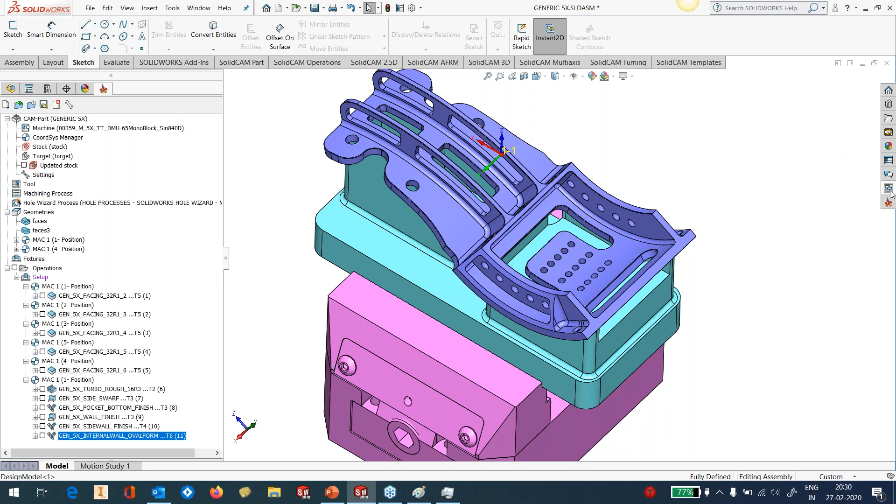Again, I have got my templates for that also. And what we are going to do is I'm actually going to machine the floor of this area. So here I'm going to use the multi-axis constant step over. And I already have the template ready. So I'll just drop it here, say OK. And what I will do here is I'll just switch off some functionality that I'm going to show you later. Okay, so this is my multi-axis constant step over.

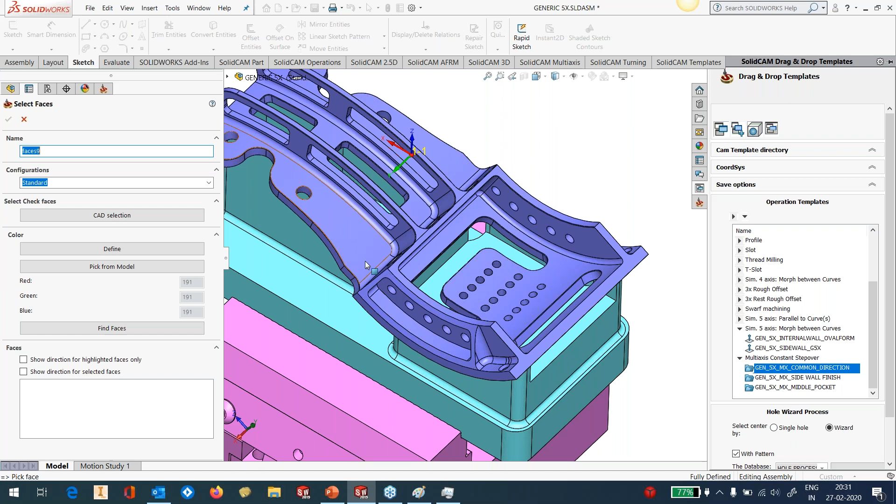I can go and pick my machining surfaces. It could be a model. You can provide the entire model as your machining surface and work only in a certain area by defining your drive curves and boundaries, or you could be specific like you work with your generic 5-axis. So I'm going to pick the surface. Okay, this is done. And it's going to be parallel to multiple curves.

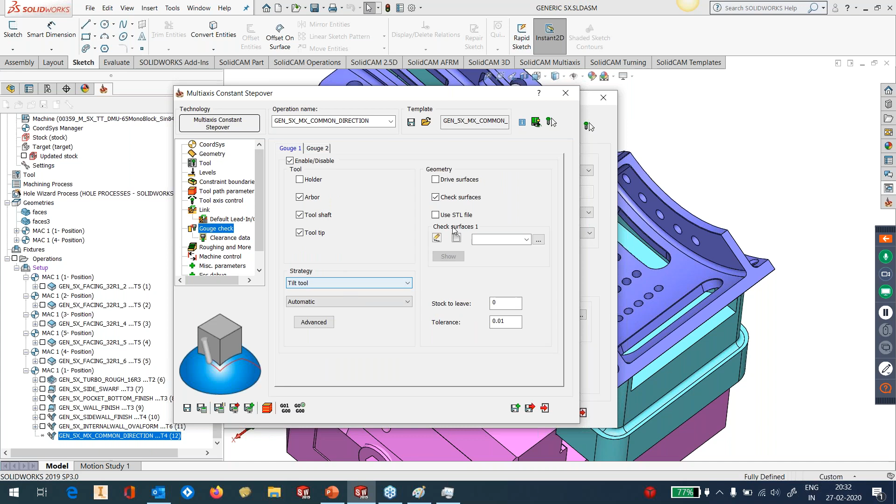So I'll define the curves. Pick this. Okay, that much is done. Let's go here. Okay, to accept. That's done. Let's say okay. Now let's go to my gouge check. I don't think we have the check surface, and I'm going to use the tilt tool, and I'll define all of these surfaces as my check surfaces for tilting

so that it doesn't collide against the surface. Okay, and in the toolpath parameters, I have defined my maximum step over as 1 millimeter, or I can say constant step over as 1 millimeter. Anyway, either of them, let's save it. Oops, the 2D boundary is empty, so it has to be contour 7. So I'll go into the constraint boundary and I'll say contour 7 also as my boundary. And let's hit the calculate button. This could take approximately a minute.

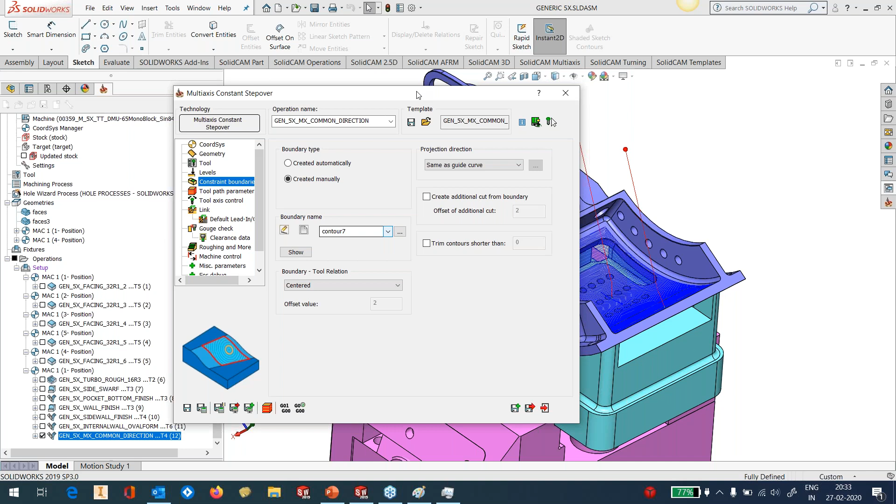Okay, that's done. Now, one thing you'll observe very immediately: why is it not getting into those holes? Although I selected this surface, it didn't get into this area at all. It just went over that area. Okay, that's because if I go into the geometry function and go into the advanced, we've got a function called

fill holes. So if you have gaps in between, which are basically holes or cutouts, it will internally fill them with surface. And you could also say don't give me any passes on the holes, so it will avoid those areas. Otherwise, sometimes if the cutout is pretty long, you're only going to waste a lot of time moving in that region. Okay, so I use the fill holes option, and this is my result.

Now, what I would like to do here is actually show you the problem. Because the toolpath looks nice, but we have some other issue here. And I would like to take it into the machine simulation. And the moment I show you the problem, many of you will nod your head and say, yes, we have got this problem tons of times and we have no idea how to fix it. So my toolpath looks very nice here.

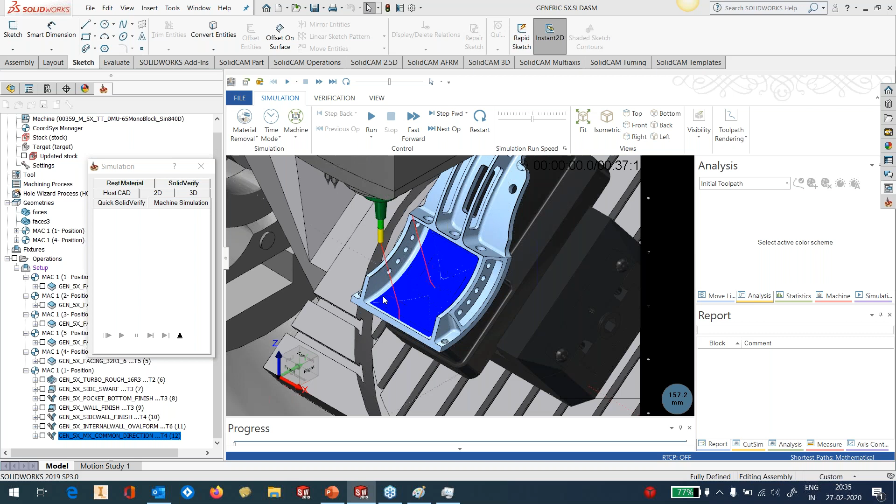But when I go into the analysis and go into my tool number, you'll see this: the retracts. This is basically because the machine construction is such that it needs to rotate the part at that particular point by 180 degrees to machine the other area.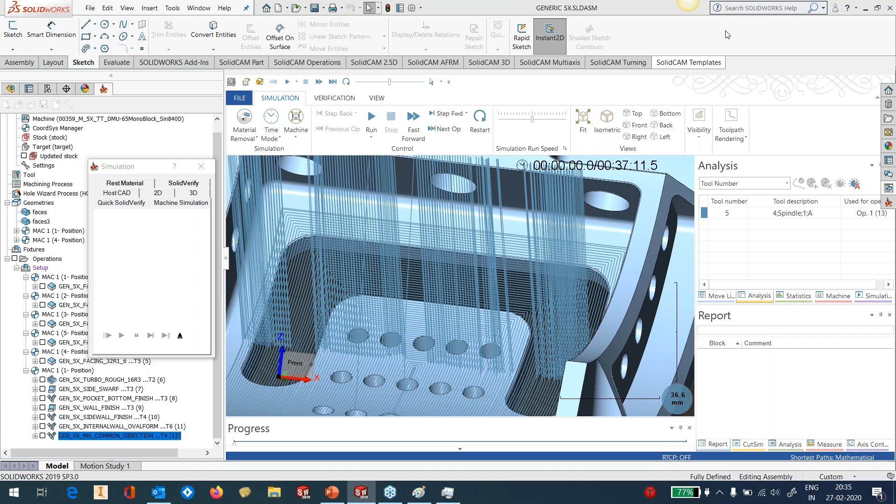So we have a feature in SolidCAM that whenever the difference between 2 points is beyond a certain degree, the tool will automatically retract to the safe plane, allow the part to rotate, and then come down. Okay, but you would have seen this many times, and most of you don't have a clue where it is coming from.

And why I showed you this is because this is a very typical surface. No matter what you do on the surface, you'll always end up with these retracts. It's a very, very typical surface. It's also to do with the machine construction, the 5-axis machine construction.

So what we are going to do is slightly different. I have another surface; I've just filled the holes. So I've got another surface here, okay? And I'm going to edit this toolpath. And instead of that machining surface, I will define this as my machining surface. Okay, perfect. But just defining the surface doesn't solve the problem.

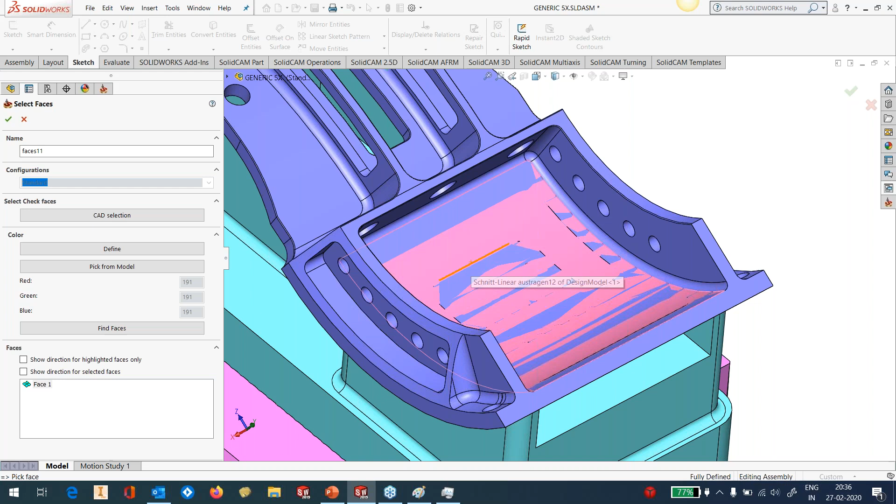There's another nice feature inside our generic engine, which again I'll call an underdog because I have not seen many people show this function or use this function. And that's in the tool axis control. If I go into advanced, we have a function called maintain common tool axis.

What this basically will do is try to find the best possible approach to the surface in such a way that it can lock the 4th and 5th axis at those particular angles and machine the entire surface in pure 3-axis. Although we have set 5-axis, the result is actually going to be a 3+2 result. And these exact angles are found automatically by SolidCAM. Okay, it's amazing. It's an underdog again. Let's calculate.

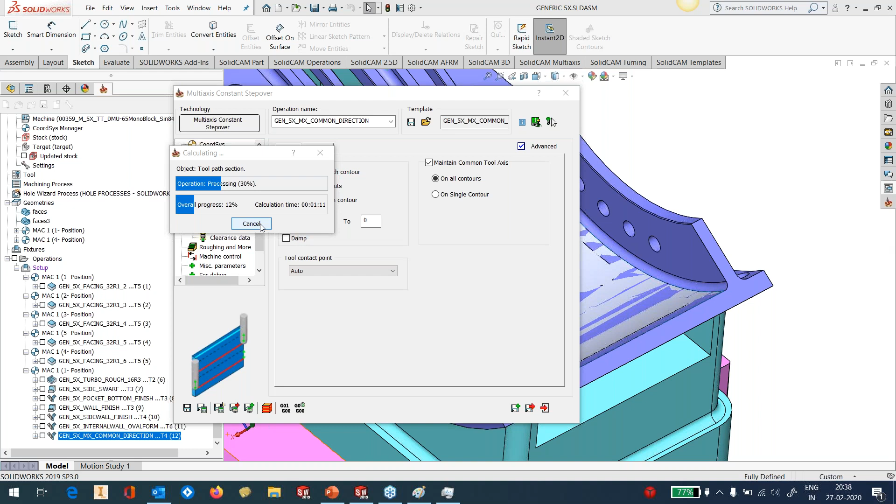I think we have a small issue here. So I'm going to stop this calculation and I'll open the file in which we can see this result straight away. Okay, so we have the result straight away here. Sorry, not this one.

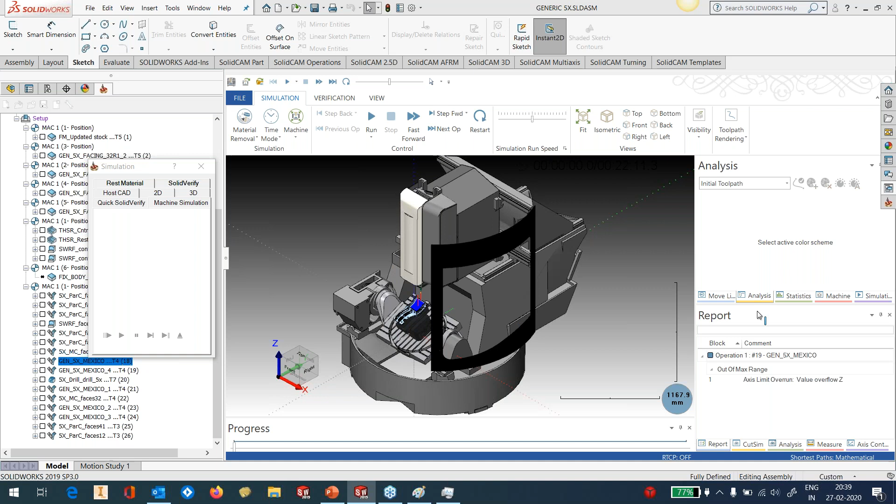You can see what happens here once you define that. If I go into the simulation and go into the machine simulation, yes, because this is the automatic clearance plane, you can see what has happened to the axis values here. The A-axis is locked at 23.505 and the C-axis is locked at 93.862. Now this is determined by the software automatically.

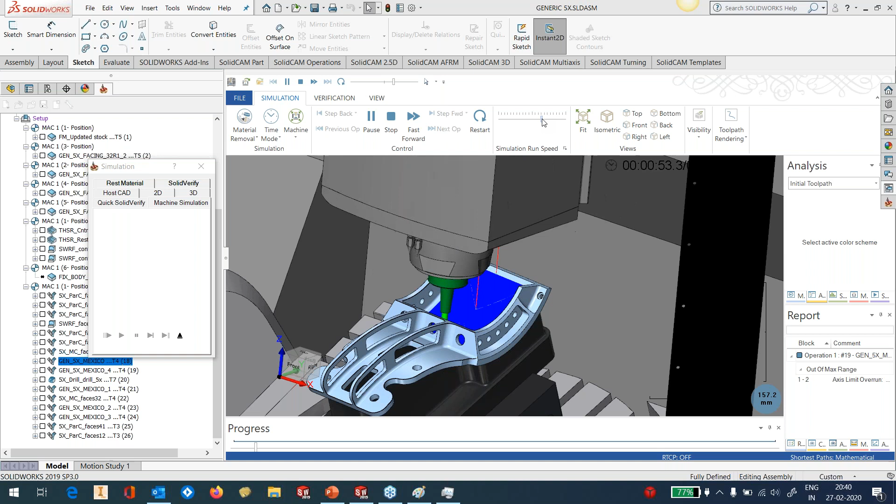And now if I go to the analysis and look for those crazy retracts, you will see that you don't find any of them. One of the ways you can solve many of your problems is to use the common direction. It's a relatively underutilized functionality in SolidCAM. We can see that it's completely 3-axis now. Complete collision-free 3-axis machining. You don't need to make any 5-axis toolpaths. It's a very powerful 3+2 functionality available inside the simultaneous 5-axis engine.

You also know that when you do machining by locking your rotary axis and swivel axis, the surface quality also improves dramatically, okay? Because you're not utilizing all 5 axes, you're only utilizing 3 axes, the X, Y, Z axis, and locking the other 2 axes.

Okay, sorry for that goof up. Let's go back to our file.

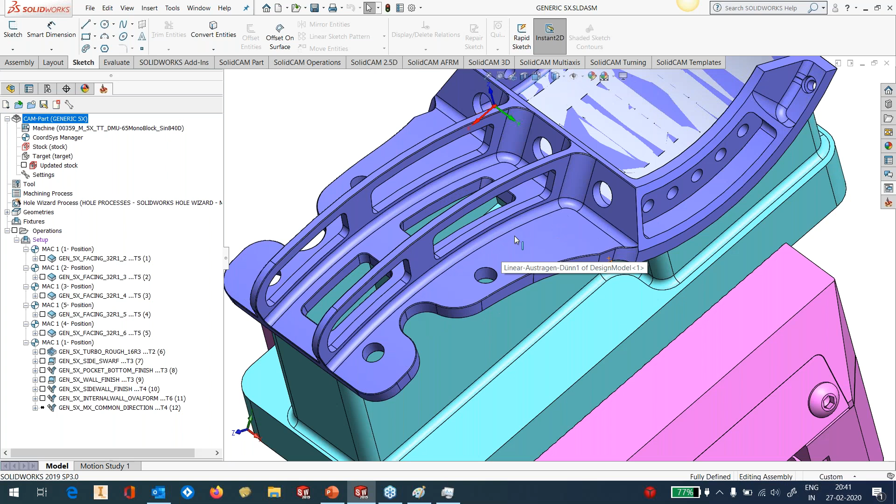Now I'll quickly show you another area where we can apply the multi-axis constant step over, and that is to machine these surfaces. Again, these have holes, but we will not do any kind of patch up or surface generation. So I'm going to use the sidewall finish template that I already have. Drop it here, say okay. Let's go to the geometry and machining surface. 1, 2, 3. Done. And since it's going to be parallel to curve, I'm just going to use my drive curve, which is the bottom curve here. Okay, that's it.

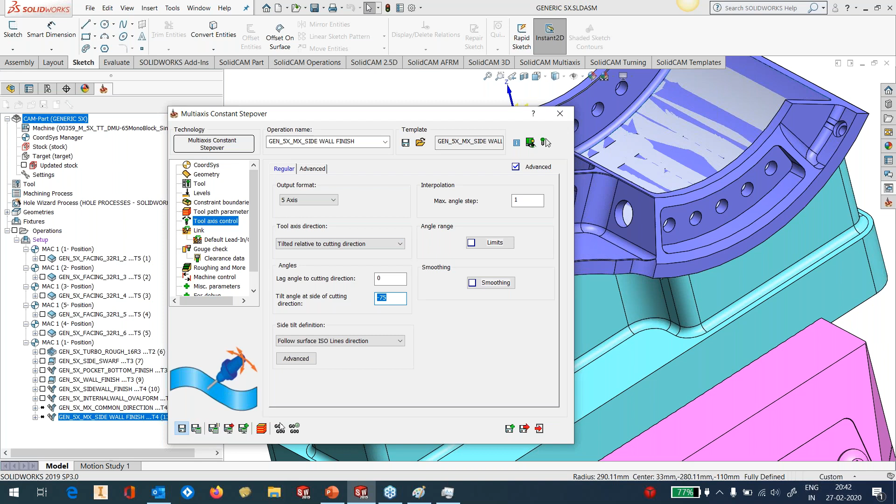The tool is a 10 diameter ball nose, and I'm giving a 15-degree tilt to it so that I use the ball side of the tool, the radius of the tool, to machine it. Let's save and hit the calculate button. Done. You can see I did not close this area, nor did I go into the link and say join direct. It's closing the holes internally inside SolidCAM and then performing the operations for machining. Very neatly done. We can do the same operation also for the middle pocket. Nice and clean operations.

I urge everyone from today, you know this functionality of multi-axis constant step over, please use it. It's a very powerful functionality, but it can be used only in generic parallel to curve or morph between 2 curves. Currently, the multi-axis constant step over is available only with parallel to curve and morph between 2 curves, but this should be good enough for you. It can create really powerful and clean toolpaths. And most important, it works directly on surfaces, not on mesh. So it creates a very, very clean toolpath.

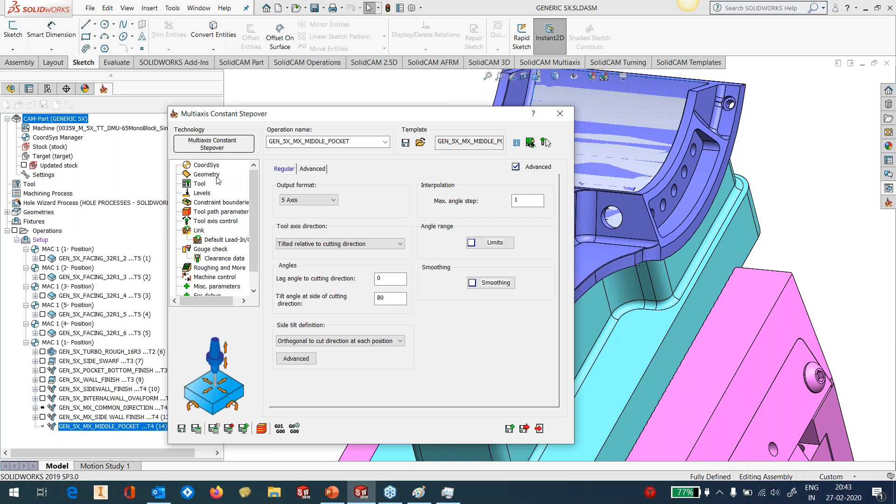Let's go to the geometry again. Machining surfaces, 1, 2, 3, 4, 5. These are the 5 machining surfaces. And the drive curve, of course, will be that. Okay, simply hit save and calculate. Check this. Sorry. Okay, since we are using a bigger tool, I would like to provide these surfaces as my check surfaces. Okay.

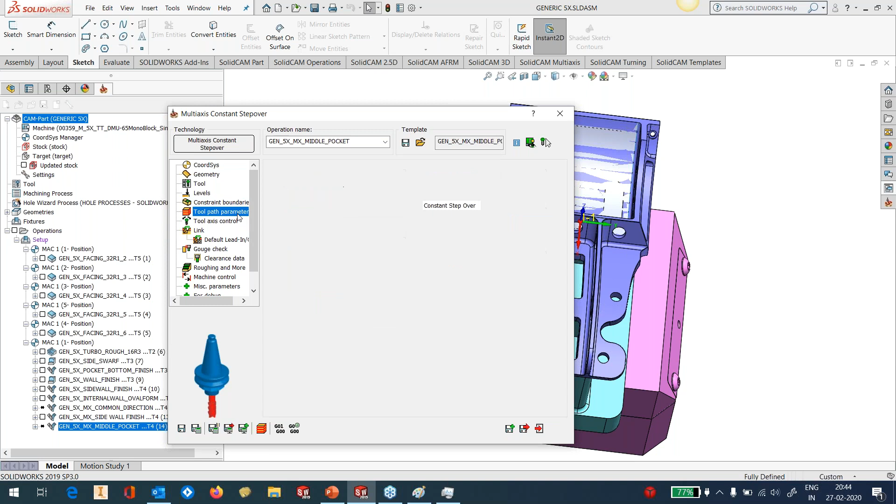Contour 9. So let's use contour 9. Let's calculate. Oops, sorry. It was an open curve, so it couldn't calculate. Perfect. Result is done. Ready. Clean toolpath again.

You can see how nice and easy it is to work with the generic 5-axis once you have got your templates in place. You can just keep applying, dragging, and working with the part as if you're working with some simple 2.5D geometry. You can create tons of templates, and based on the geometry, based on your judgment, you can easily apply those templates and work with generic 5-axis without getting into the depth of the template on how it has been done, why it has been done. You know it works, you apply the template.

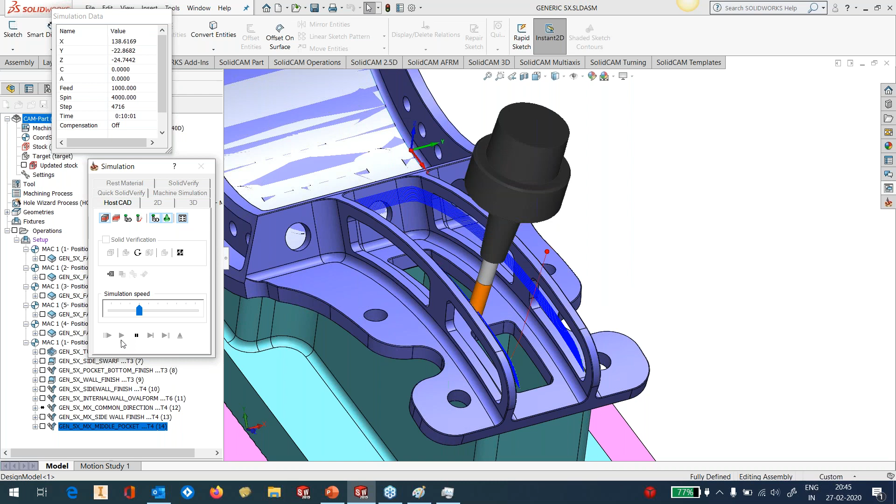All right, so we have completed day one. It's like 1 hour 15 minutes today. We have completed day one of our webinar. I assume that we will have at least another 4 of them, because I have got some very nice parts to show you for more generic technologies that we can apply on those parts. Almost all of them are either general engineering or aerospace parts, and we will also take in the next week one application-based strategy. I think it'll be screw machining, because since we have done a lot of improvement, I would like to show screw machining along with the generic part itself.

So if there are questions, you can ask me questions. I believe there are some questions already. Missing the approach and retract link on every side. For which is this, Marcus? Maybe Marcus, you can get in touch with me over Skype and ask me what it was. I can send you this part. But I think in some of my templates, I have not used leads and links, just to show that you can always go back, edit, and do the toolpaths.

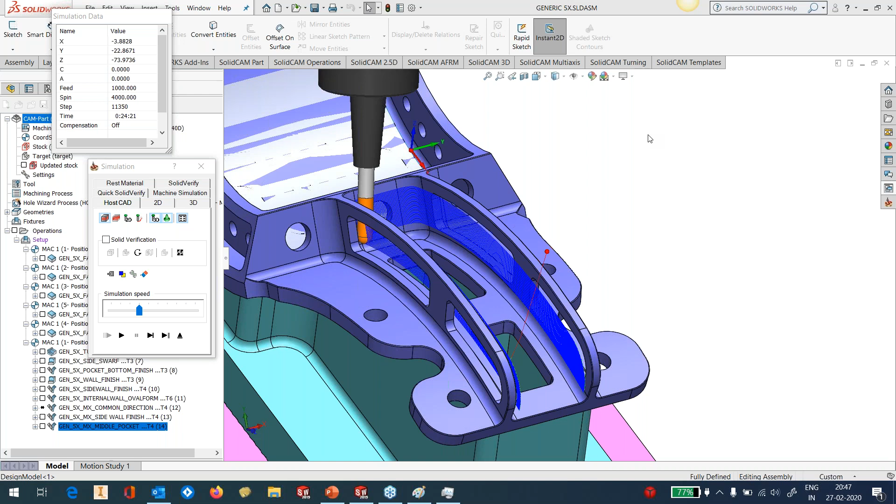There's another question on how to use tool compensation for swarf milling. At the moment, we do not have tool compensation for swarf milling. In the event that you would like to use a swarfing kind of a technology, then I would suggest you to go back to our generic machining. So if I go into, not this one, sorry, on the swarf. If I go into the generic technology, where is it? Sorry, we moved several things here. Here it is. We've got the 3D tool compensation.

So we currently don't have it on swarf, but we can definitely take it as a feature request and see how quickly we can get the tool compensation back onto swarf. But in the event you would like to use tool compensation, just ensure that you use the generic 5-axis, and you can use the tool compensation for generic 5-axis, provided your post processor is supporting the tool compensation functions.